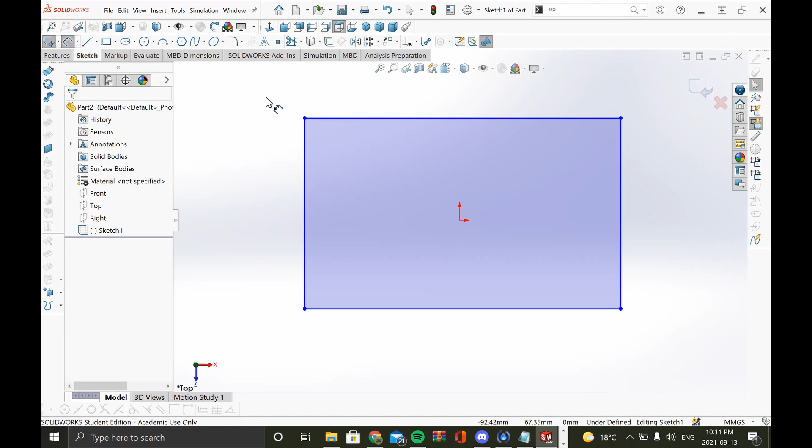Once you click on that tool, let's say I click here, you see this line has a length of 176.25 millimeters. If you want to change that, you just click, and let's say I want to change it to 80 millimeters, so I type 80, and there you go.

It's changed to 80. Let's say I want to change this line to maybe 60. I click it again, 60, and there you go, I changed it to 60. This Smart Dimension is going to be your best friend when you're trying to model 2D shapes.

It can basically allow you to modify the length of really any line or any points you need. You can even use it to modify angles, but since it's a rectangle, we don't need to modify angles, since every angle would be a 90-degree angle, and I don't want to change that.

But there is a cool thing that SolidWorks has in combination with the Smart Dimension. It's called the power trim.

First, let me start by sketching a line somewhat in the middle of this rectangle, sort of like that. So I just sketched a line right there.

There's this neat tool called the power trim. If you look at your sketch toolbar, there should be this option called trim entities.

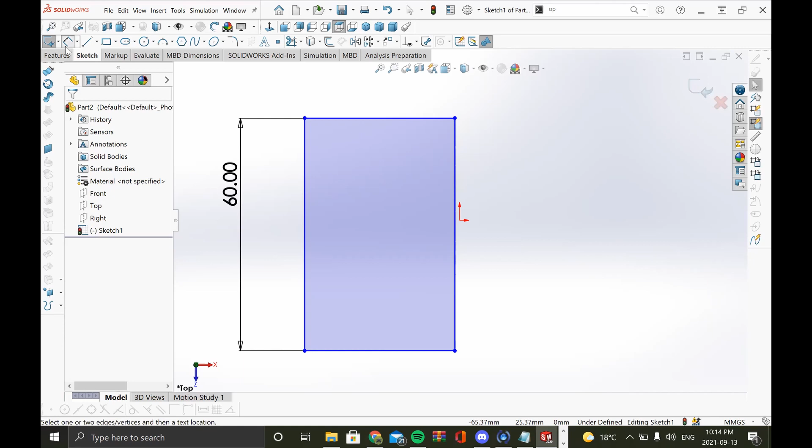To make sure that what I did was actually true, if you take the Smart Dimension of the new line right now, you can see it's pretty much exactly half of the length it was originally. So now you know that I did cut it in half, which is what I wanted to do.

Now, one thing that I don't like is that, as you can see, this right here is the origin. This is the origin of all sketches, and my rectangle isn't really at the center. So I do want to change that.

And how you can do that is with this thing called sketch relations. Basically, first you unclick your smart dimensions just to let SolidWorks know that you're not dealing with that anymore. Then you hover over this line. You have to exit your sketch too. Then you start by hovering over this line because you really want to get this right here. There's this dot right here, and you want to click that.

Click the wrong thing. It is really tricky. That's why I advise you using a cursor anytime you're CADing rather than a trackpad. It would just be easier for you. So once you click that midpoint, you can also click the origin itself.

So now I have these 2 points selected, and if I want them to basically be vertical with each other, you just add the relation vertical. Any questions so far on what I just did? I basically wanted to center my rectangle on my screen and then on that whole top plane.

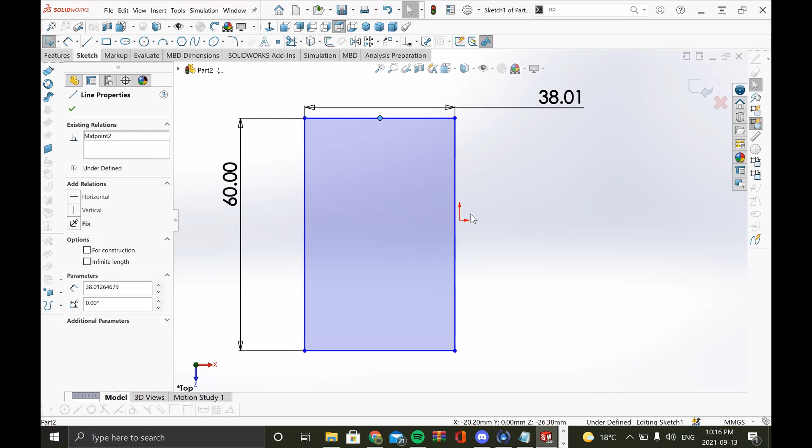So this top line right here, just hover over it and you would eventually come across the dot right here. Select that. You deselect the wrong results because I accidentally selected that. But yeah, it's the midpoint that I wanted to select, and you can see it selected. Then you hold Control to select two things at the same time, then select the origin right here. If I can do that.

So now I have both the midpoint of this line and the origin. And because I want to shift this rectangle to the right to make sure that they're both on the same vertical line, in this tab right here that says add relations, I just click vertical. So now I made them vertical to each other.

So yes, you do have to select the actual entity that you want to add that relation towards, if that answers your question. If it doesn't, just let me know, then I can explain a bit more. No, that's good. Thank you.

All right. So once you've made that, I basically managed to center my rectangle on what I wanted, which was, yeah, I just wanted to center it on my screen, center around the plane, just makes things easier.

Now, after that, so far we've discussed how to make shapes, how to use a smart dimension, how to trim entities, and how to add sketch relations. By the way, because this workshop is 2 hours, I suggest that you play with it on your own time, because I'm really just giving you a good framework as to where to start your learning, but don't assume that when you're done with this workshop, you can get 100%. Really, a lot of SolidWorks skills come from actual experience rather than lecture.

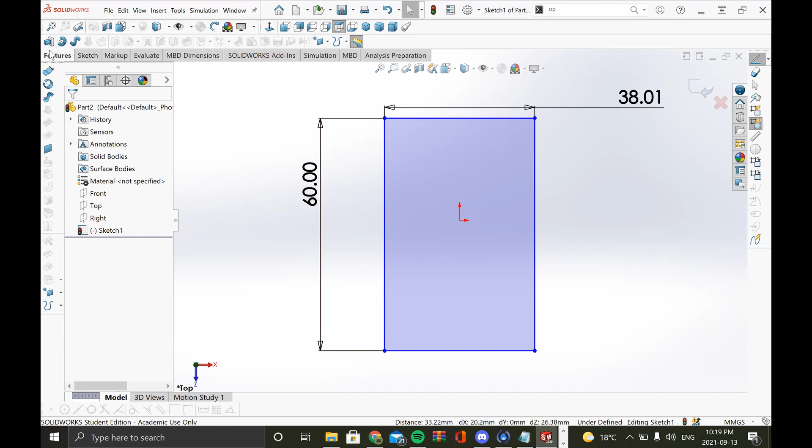So I'm going to stretch my 2D shape on a 3D plane, as you can see here. SolidWorks has really good UI, so you can either use the arrow to drag it up and down to see how high you want your 2D object to be, or you can be specific by manually inputting the dimension over here. Let's say I want it to be 30 millimeters high. There you go. Then you click OK. And there we have it. Now we have a 3D object.

Any questions so far on what I just did? I'm just going to be continually asking this just in case for those who are modeling alongside me, just to make sure we're all on the same page. If not, then I'm going to continue.

One thing that is really good about SolidWorks is that they allow you to backtrack a lot. So even if you're done with this and you realize you need to change something you did before, if you see this blue line on the side tab, this is basically your rollback feature. Think of this whole thing as a timeline, and this blue line is where you're at right now. So if you want to go back in time and change a small feature that you did, just so you can make things more suited towards your needs and go back towards your current timeline, you can do that in SolidWorks.

So you basically drag this line up, and as you can see, we're back to the time where I didn't create that 2D shape. And now, like if you've made your edits and everything, you can drag the line again, and now we're back to the future, if that makes sense. This rollback feature is definitely going to be your best friend, because as you're CADing, you get tired, you might miss a few details. This is more advanced than a basic undo button, because it really makes you be specific as to which point in time you want to go back towards. And once you go back towards that time, you can edit your features, edit your sketches, and go back to the future on your current timeline, just so nothing would be misplaced, and all the features will be towards your needs.

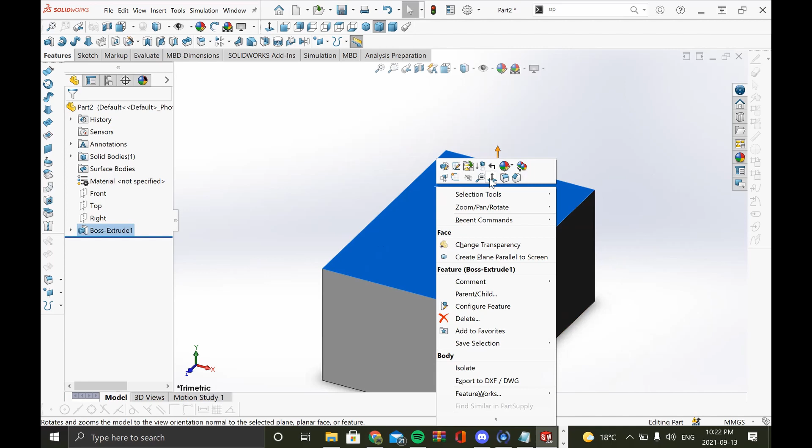So what I do is right click this, and all these icons here, you look for the one called normal to, that basically puts the camera, us, at an angle normal to the shape, just so we wouldn't be sketching at an angle. You never want to sketch at an angle because it's really a perspective view, and you want it to be normal to that view. So you click normal to, and now we're normal towards that shape.

Let's say I want to make a circular shape on this surface, then cut a circular hole through this block. And I can do that. So what I do is I select this face, then I sketch on this face. I start my circle. Again, there are different ways to create a circle. You can start with the middle, or you can build a perimeter around a point that you want the circle to be on. But I'm just going to be simple and start with the middle of the circle. So I just click anywhere in the rectangle, then I drag my circle here. Let's say I want my circle to be this big.

But if you don't want it to be that big, again, the smart dimension is your friend.

You can tailor it towards your need. If you don't want it to be 29, it can be, let's say, 25, and that's fine too. So now that you have the circle, you have the size of what your hole wants to be. Now you have that 2D shape, and you want to make that 3D hole on your 3D model.

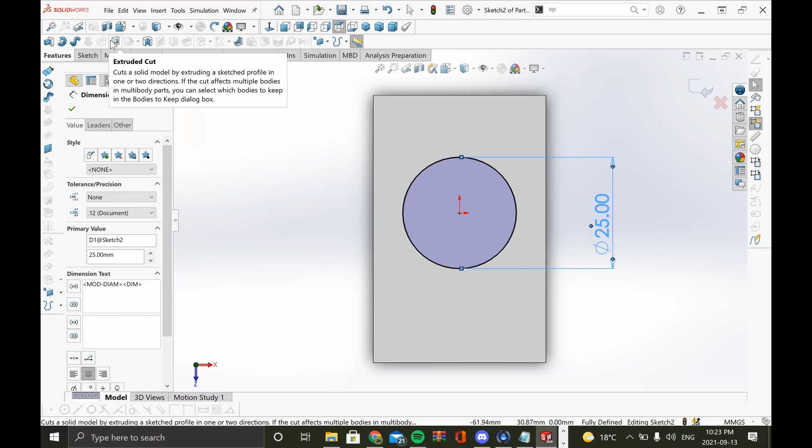Anytime you're doing anything 3D, once you're going from sketch, you go to features. So now we've dealt with extruded boss base. Now we're going to deal with extruded cut. Extruded cut doesn't stretch the circle on a 2D plane. Rather, it makes that circle into a hole that can cut through your models. So extruded cut is what you're looking for.

If you're working on a cursor, you can click your cursor wheel and move it to see how your hole is going to be on your model. Let's say, yes, I want my hole to go through the entire thing. Or if you don't want it to go through the entire thing, you can just drag this arrow right here. If you want the hole to stop at the middle, that's fine. If you want it to go all the way through, that's fine too. But I want mine to go all the way.

Can we do this on a trackpad? I'll be honest with you, CADing is pretty hard on a trackpad. It's definitely different movements. It is possible, probably, because I'm pretty sure SolidWorks accounted for that, but it wouldn't be as precise as a cursor. I'll show you later on how to do it on a trackpad though.

But once you make this... yes. Sorry, your microphone's making a strange sound at some points. Would you be able to just disconnect and connect it again? Maybe that'll fix it. Yes, no problem. I'll be back in a jiffy. Then give me a sec.

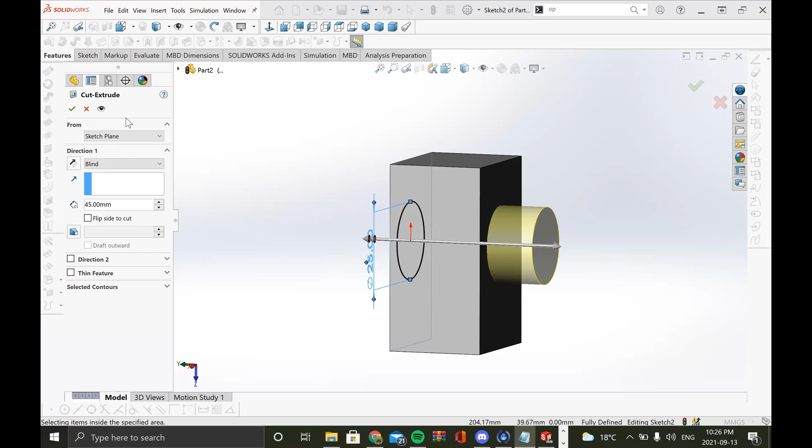Okay, back to what we were doing. So now we made the hole, and we determined how big we want it to be. So I click the check mark, and there's our hole. Now, just to reiterate what we did: we clicked the surface, we sketched on the surface, we used the extrude cut feature to determine how deep we want our hole to be, and we made the hole.

We clicked the check mark, and now we've made that hole. Again, just to show you how efficient this rollback feature is, you can literally roll back to the point in time where you just finished your extrude but haven't started your cut. So if you do that, now we're back to the point where we didn't even start doing the cut. But if you want to roll back to go back to the future, now rollback is your friend, smart dimension is your friend. It really helps, I'm telling you that right now.

Okay, now you've learned how to create 3D models. Now you've learned how to cut on those 3D models, but we're going to do a bit more advanced stuff. First thing you want to do is, a lot of the times when you're engineering in general, people don't really like to have sharp edges.

So there's this feature called fillets and chamfers. It's on your feature toolbar, and it looks like this. This is what you should be looking for. Fillets and chamfers, instead of sharp edges, offer a curve, which might be for aesthetics, might be for safety reasons, whatever you want. They're there for you. You can click the dropdown if you want a chamfer instead of the fillets, but I'm just going to make a fillet.

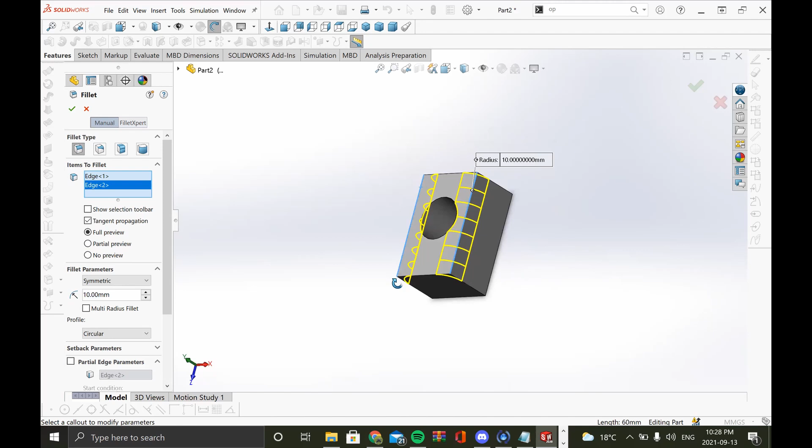Yep, that's good enough for me. Again, you can alter the radius of the fillet because it's a circular shape. They don't really use length to measure how big you want it to be, they use radius because it's that circular path. I'm going to make it, let's say 8 millimeters. That's good enough. Once you're done with that, you just click the check mark, and there you go.

Now you have the fillets. You don't have those sharp edges anymore. You might even do it not for safety, but really just to make it more aesthetically pleasing, which is fine too. But that's how you do that.

If you want to add a chamfer, it's really just the same procedure again. So you click this icon right here, but this time you click the drop down and you select chamfer. Then you click these edges right here, whichever edges you want to add the chamfers on. I'm just going to click these edges right here.

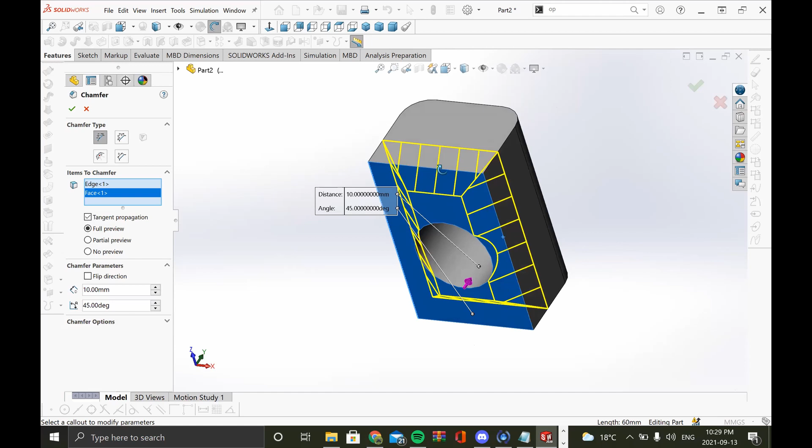This is where the cursor really comes into play, because I'm not sure how accurate you can be on the trackpad. Again, you can alter the length and the angle of your chamfers. I'm just going to make it into 5 and 45 degrees, which is fine with me.

Now to answer that person's question about how you rotate your model with a trackpad, if you don't have a cursor wheel, what you can do is go to this toolbar right here, and there's this thing called view orientation. If you click that, you can basically see, okay, I want to go to the top, I want to go to the side, I want to go to the bottom. And yes, that's how you can view the different parts of your model while not having that cursor wheel.

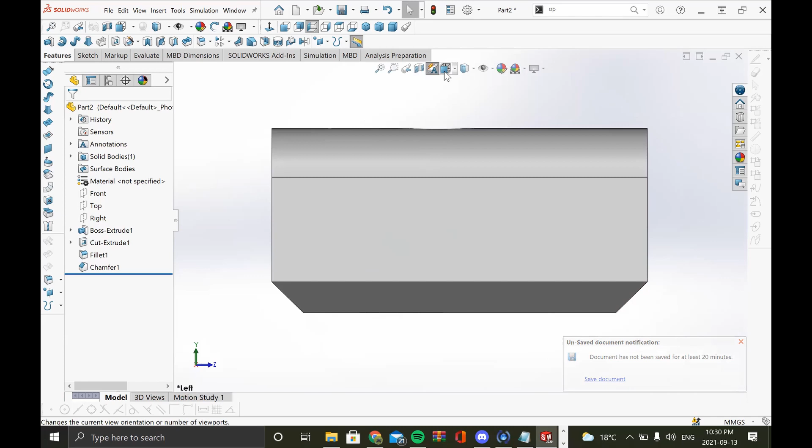Remember to save your document, guys. I'm not going to save this because I already have a document ready for you, but remember to save every now and then, because, you know, CAD in general, it's really frustrating when you crash. So save consistently, rule of thumb.

Yes, you can press space too. Either that, or you can right click and this wheel comes up. It's just different shortcuts, but whatever suits your needs, you can do that. I just personally like using the cursor wheel because I feel it's faster and it allows me to view it at my own custom angles.

Next, we figured out how to make 2D shapes. We figured out how to use the smart dimension. We figured out how to use the trim entities, sketch relations. We figured out how to do an extruded boss, how to cut holes. We figured out the rollback feature. We figured out fillets and chamfers. But now let's get into the more advanced ways of making 3D models.

So if you want, you can save this, but I'm going to make a whole nother model right here, so don't save for me. And I'm going to make another part just to show you some of the new things that SolidWorks installed. Okay, so back to square one.

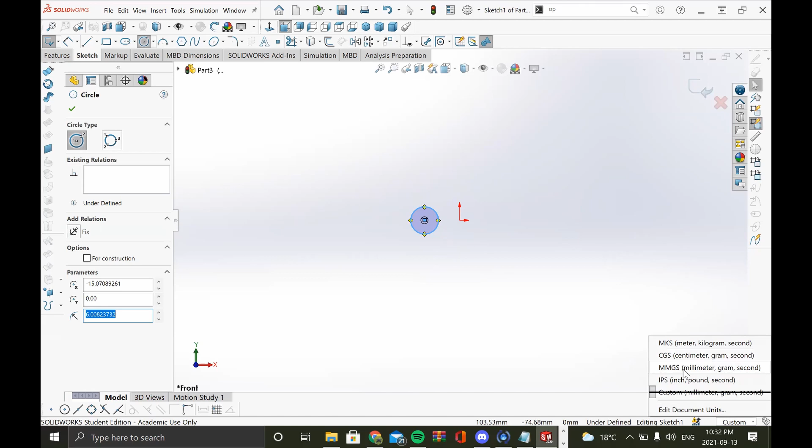Let's say I want to make a sketch on our front plane, do the same thing, sketch, and let's say the front plane. Now what you can do is start with, I'm going to start with a circle. Simple, easy enough. I start with a circle, basically that size. And before I do my measurements, just remember to change your units. It can be any unit you want, but I'm just going to go with MMGS. Right click your sketch, edit sketch.

One thing I like is that it doesn't always have to be a sort of linear extrusion. You can extrude to make 3D models at different angles. You can even do revolve or sweeps. So that's what I'm going to go over right now.

So in order to do, let's say we're aiming to do a revolve, which basically rotates your 2D shape along an axis to make a 3D model. So what we do for that is first make some construction lines just so we know which direction we want to revolve around.

So you go to sketch, and let's say we want to make our axis. So we want to make a line, but not just any regular line. You have to click the drop down and click center line, because that's going to be the center of our revolution.

So you just have to make it vertically, and you know it's vertical because of that yellow icon. And now we've made the axis for this circle to rotate on. And now we have that.

We go to features, we go to revolve. You do select the line because it's our axis of revolution, but you also make sure the circle is what SolidWorks is referencing. So as you can see here, they basically took the circle and revolved it around the axis, and that's what we wanted. So basically they took this 2D object, revolved it around the axis in order to make this 3D donut.

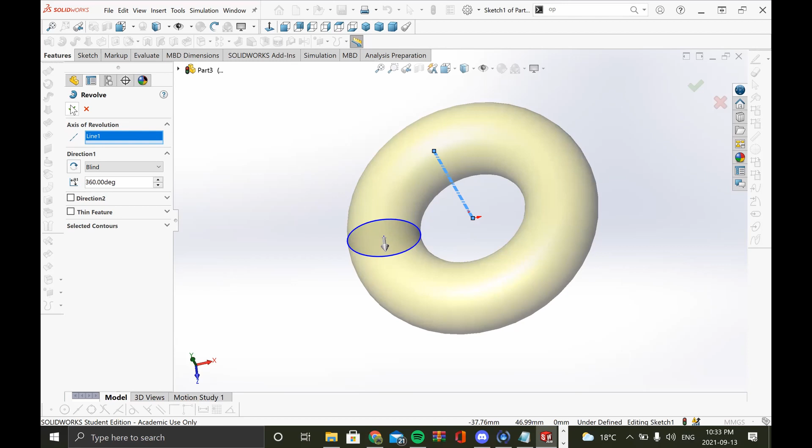So just so you know, there is more than one way to make that 3D object. It doesn't always have to be that linear extrusion. It can be done in different ways, and this is an example of the revolve feature. There are other ways too, like you can make a swept boss or base, whatever suits your needs.

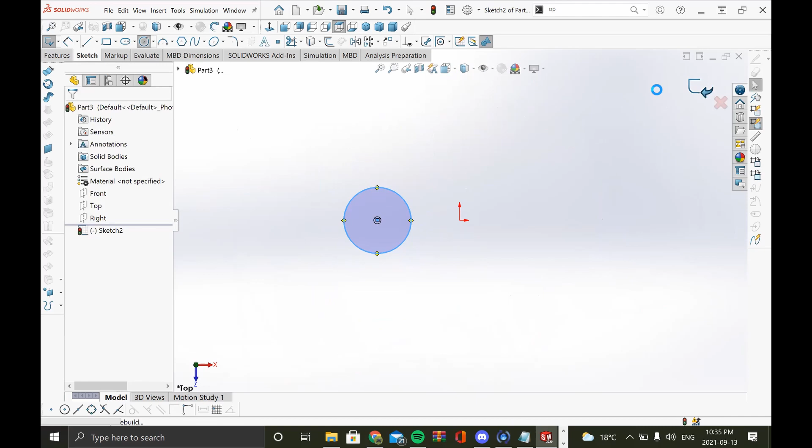This is where the more advanced techniques come in. Then I'm going to sketch again, but this time on a different plane. So basically what I just did is click this icon, which is always here. This is basically your design tree, and in the case that you're currently working with a feature, you can click this to view all the planes again.

When you're dealing with swept boss bases, you want to make sure your second sketch is on a plane that is perpendicular to your first sketch. So since I sketched on the top plane, my next one should be on the front plane, if I can get it right. That should be good, yes. So we just right click the front plane so I can go normal to it right there.

Now that we have our shape, we need the actual guiding line that is going to be swept around, so this is where splines come in. I'm just going to use a spline. It's easy enough—a spline is really just like a freehand form of sketching to make curves. You can just click the different points, and SolidWorks will automatically make those curves for you.

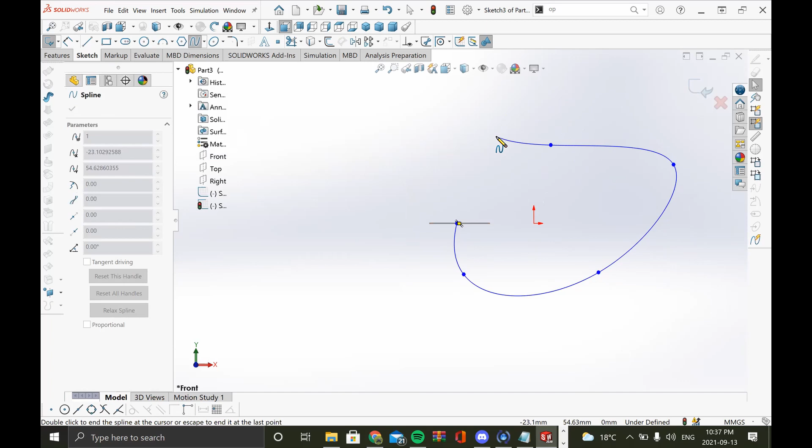That's good enough for me. Okay, so—oh wait, it deregistered. Hold on. That's good. So once you're done, you just click the spline option.

So now, as you see, you have two sketches on two different planes, and they absolutely have to be perpendicular to each other, or the swept boss base feature is not going to work.

Okay, so now we're going to start with the swept boss base feature. As you can see here, I basically replicated these two icons right now. First, you need your profile, then you need your guide path. Our profile, in this case, is going to be our circle right here, and our guide path is going to be that spline we created that's perpendicular to the circle.

And as you can see, SolidWorks took that circle and guided it around our path to make that 3D object. So this is basically what the swept path does—once you have that 2D shape, it stretches it along that path in order to make that 3D object.

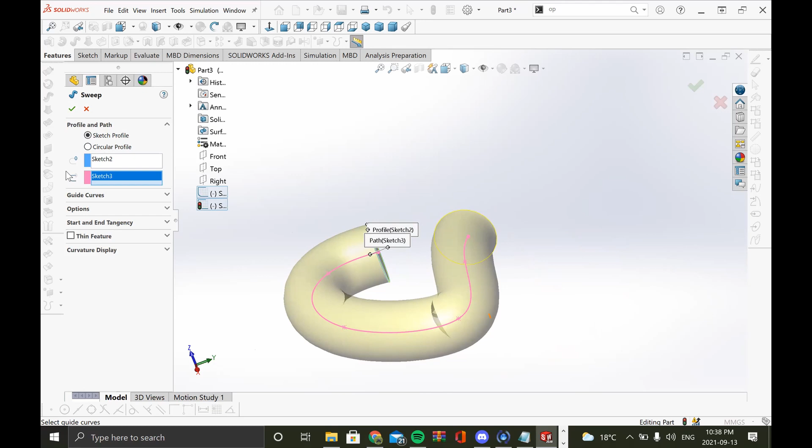This is particularly useful when you're dealing with tubing, so to make tubes with custom shapes rather than just linear extrusion. You can make your own path, set the diameter of the tube, and use this swept boss base feature to make that tubing according to the path you wanted. So I clicked my sketch, clicked the path of my sketch, and SolidWorks did all that for me. And that's the finished product—sort of like a tube.

Next, if we are in the process of making a pipe, obviously this isn't really a pipe yet because nothing can run through it. So I want to introduce you to one feature called the shell feature. This basically creates an offset of your 2D shape and hollows out your model.

So what you want to do is go to the shell right here, and you click the 2D surface that you want to start that shell from.

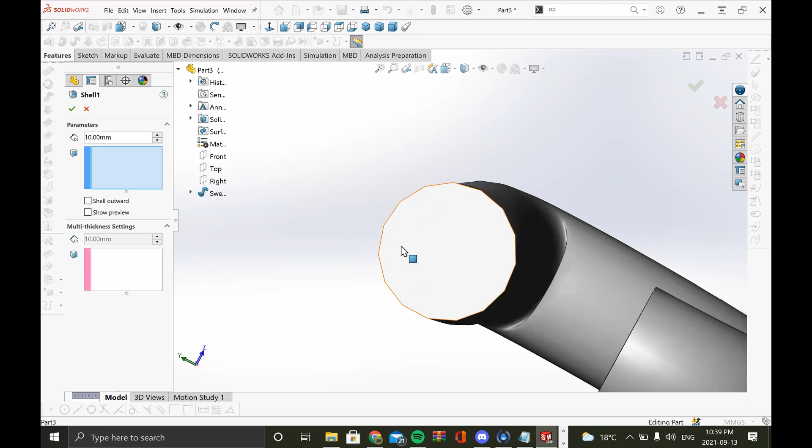Sorry, I think Marco has a question, he just raised his hand on Zoom. Do you have a question, Marco? You have a question about this guiding tool.

What technique would you have if the guiding path and the profile aren't perpendicular to each other? So you want something maybe that's not this flat tube.

Yeah, so the reason why normally people try and do it perpendicular is because that's a sure way to make sure the sketches are connecting to each other. Because if they're not connected, SolidWorks wouldn't be able to verify which is the sketch and which is the guiding path.

But in the case that you don't want it to be perpendicular, and you want it to sort of be swept at an angle, in that case you wouldn't be using regular sketches. You'd be using a feature called 3D sketching, but that's outside the scope of the CSWA, which is why I didn't go over it.

If you want to learn about it, you can do that. 3D sketching is basically, instead of sketching on normal planes like front, top, and side, you can sketch at any sort of angle at all. So you can sketch at multiple angles at once rather than singular planes, which is really beneficial, but it's outside the scope of the CSWA, so I wasn't really planning on going over that.

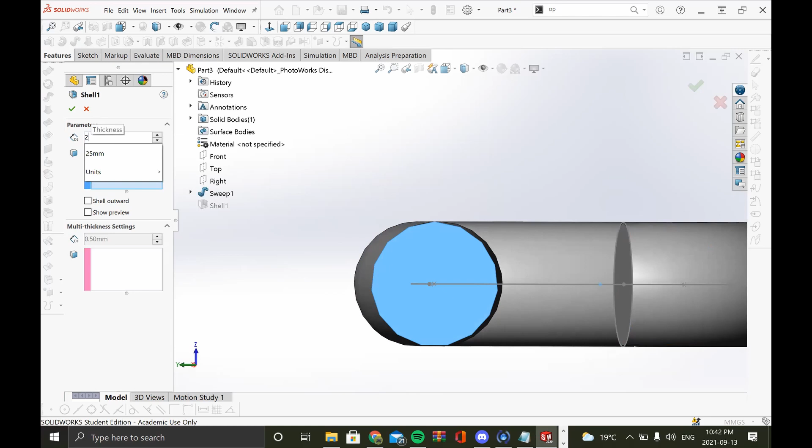Let's check. Yeah, that looks too small. It did it, but it's too small, so it looks a bit awkward. I'll make that just a bit bigger, let's make that 2. And there you go, that's your tube. As you can see, it basically hollowed out the inside of your pipe, so now water can flow through it.

Any questions so far on the feature I just did? We just went over how to create sketches on different planes. We just went over how to use the swept boss feature. And now I just taught you how to use the shell feature, which basically hollows out your models.

Just to reiterate, for the shell feature, you really just select the surface that you want to shell out and select your thickness, basically the thickness of the shell, and you just click OK for the most part. And now we've created that hollow tubing that we wanted.

Now, if there are no questions about all the modeling I've done so far, this is where we get into your answers for the CSWA. Basically how the CSWA is constructed is that they ask you to model an object, but you don't submit CAD models, rather you submit the masses of those CAD files, in kilograms or grams, and that's how they judge instantly whether you're correct. Which makes sense, because if you get a dimension off, it wouldn't be the right mass.

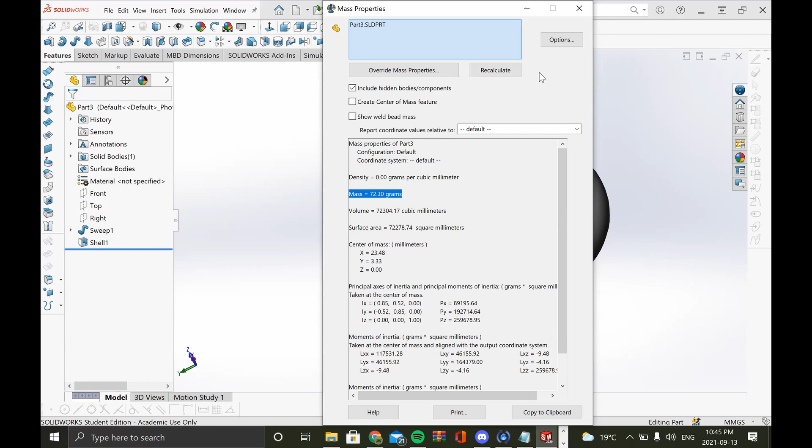The CSWA question was to create a sketch on two different planes and make a tube out of it according to the dimensions I just used. They wouldn't ask for the CAD, just the mass, so they know you got it exactly right. I'm pretty sure they only allow a 1% error, higher or lower, so they're pretty strict on your mass value. That's why you can't guesstimate it, you have to use the mass properties feature to make sure you get it right. So my answer would be 72.30 grams for the mass of my pipe.

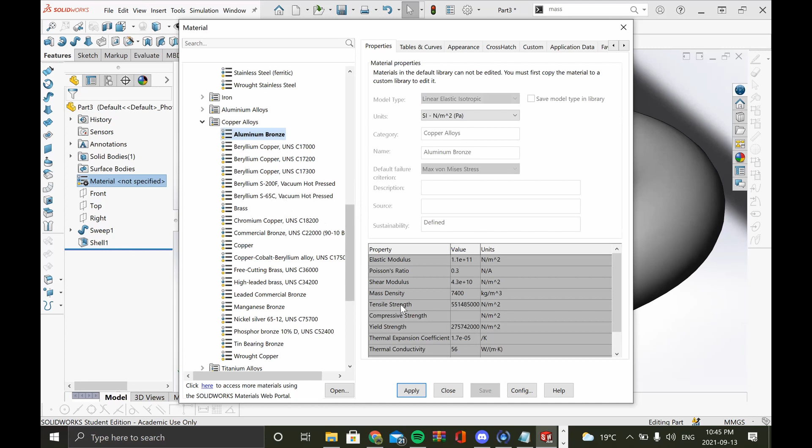But one thing they can do is ask you to specify the material of your pipe. Right now, SolidWorks default setting makes all your models steel, but you can change that. In the sidebar, right click and click edit material, and you'll be able to choose which material you want your model to be. It has a plethora of materials, different kinds of steel, reinforced steel, hardened steel, wrought stainless steel. Let's say I want mine to be a copper alloy, like aluminum bronze. I click apply and cancel this, and the color change shows the material has changed.

Once we click mass properties again, go to the command prompt, type in mass properties, and it will show up. As you can see, my mass has changed, and this makes sense because I just changed the material the pipe is made of. Once you change the material while maintaining the same volume, due to density and other properties, it's going to get either heavier or lighter. Because I changed mine from steel into an aluminum copper alloy, the mass went up to 535.05 grams, and that would be my answer. So the basic formatting of these CSWA questions is that they give you technical drawings of models, ask you to model them, and for your answer they just ask, now that you've modeled this, what is your mass value? Because that's how they know you modeled everything in accordance with how they wanted.

So now that we've done the basic modeling of parts, although there's quite a bit left to cover, I just wanted to give you the basic SolidWorks UI and how to convert that 2D shape into a 3D model. Now that we've done that, we can start venturing into the world of patterns.

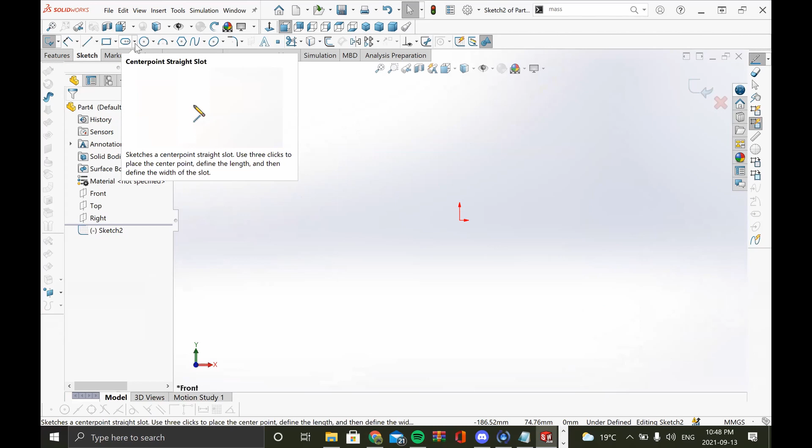We've done a rectangle, we've done a circle. Let's say I want to make a slot. There are different ways to make a slot: straight slot, center point straight slot. I'll just go with straight slot. You click two different points, then modify the radius and such for how big you want your slot to be. You click, and there's your slot.

Sorry, unfortunately your microphone's making noise. Maybe if you just unplug your microphone and re-plug it back in, would that help? I think the thing with the audio drivers is that it's embedded in the computer itself. Let me stop sharing for a bit. Now it seems to be okay, actually. I just switched my mic to an external mic.

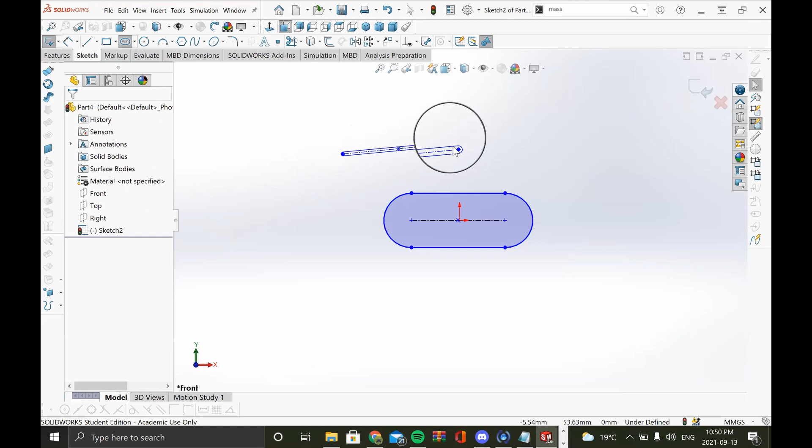Screen share. Okay, we just made the slot, and now I want to show you about patterns. Oh wait, I did not mean to do that, so let me just remake the slot once again.

Next, we want to make a pattern of this slot. In case we don't want to make the slot over and over, we can make a pattern of it instead. You go to Sketch, then Patterns. There are different ways to make a pattern: you can mirror it on the plane, make linear patterns, or make circular patterns.

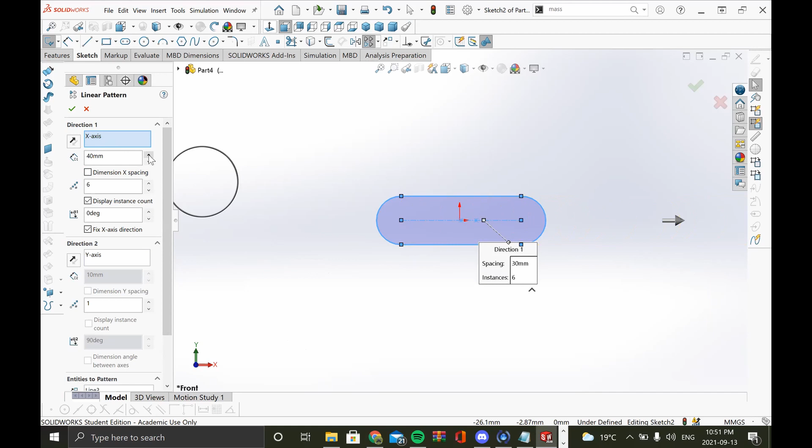I'm just going to make a linear pattern. You click linear pattern, and if you want to make it on the x-axis, that's fine—if you want the y-axis, that's fine too, but I'll leave it at x-axis. You have to click the sketch you want to make the pattern on. There are different settings: if you want multiple entities, that's fine, and you can adjust the spacing of these entities. I'm just going to make two for simplicity's sake. That should be good.

As you can see, it basically made a duplicate on the x-axis of that sketch I just made. Any questions so far?

How late does this go? It goes till 9 p.m. PST. Can you confirm that? It goes to 9, yeah, it goes to 9.

What I have planned is that from 8:30, that's when I really work on a specific CSWA question, and I have 30 minutes attributed to that. So if you just want the basic ideas and framework of what to learn, 8:30 is when that happens. CSWA stands for Certified SolidWorks Associate—basically an exam you can take to get certified and show your SolidWorks skills. You don't need to pay for an online course for it, you really just pay for the exam itself. You go on the SolidWorks website, and I think it costs around $99 or so. If they change it, you pay for the exam and you can get certified to put on your resume for SolidWorks skills. So yeah, it's really just an exam that shows your skills in SolidWorks.

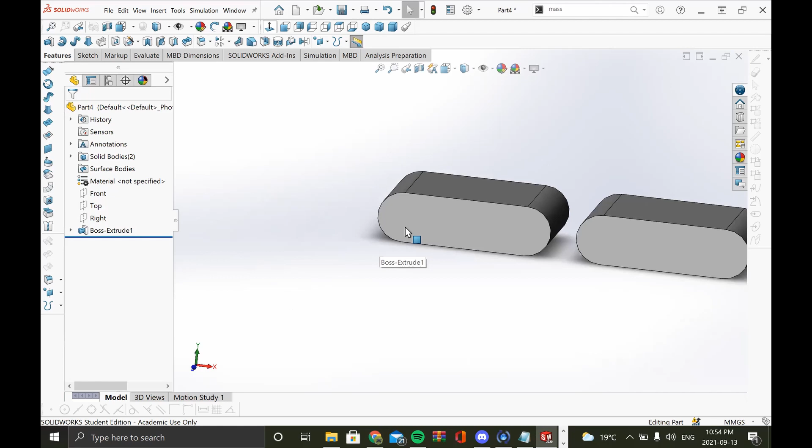Now, one cool thing I find about 3D modeling is that you can really choose to amend your models at any point in time. I taught you two different ways. Number one, you can use the Smart Dimension tool to edit your sketches, and you can also use the rollback feature to go back in a point in time to edit your features.

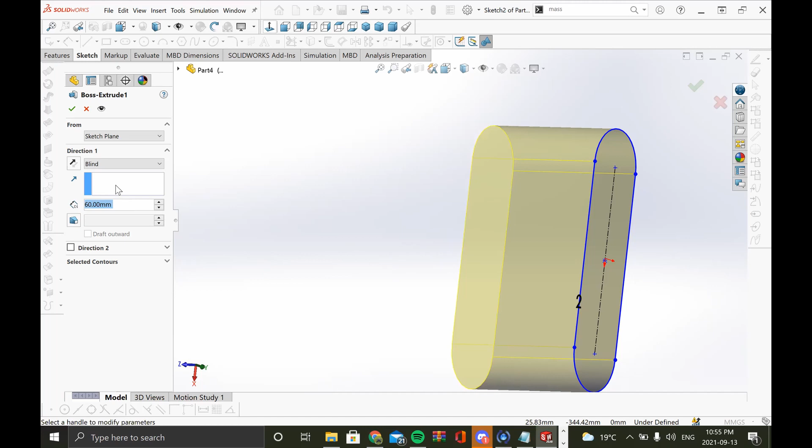But what if I wanted to change the height of my boss extrude right here? What if I want to change that? Let's say I want to make it a bit higher. So what I can do is right click boss extrude, then click edit feature. As you can see here, I go back to the original tab for boss extrude. Now let's say instead of 70, I want to make it 60 instead. So now I made it 60 and everything's good, so now they're both 60. It just allows you to edit those boss extrude features and be really malleable in your design rather than just having strict values that you can't Control Z for.

So now we've gone over linear patterns and we went over how to edit your already made extrude. So what I can also do is show you how to convert entities. Converting entities really just applies or projects 2D sketches on 3D surfaces.

So if you click here and it's a sketch feature, I believe... what's it right here? Oh, it's the wrong one. Oops. Sketch - it's called offset entities. You click sketch and you click offset right here.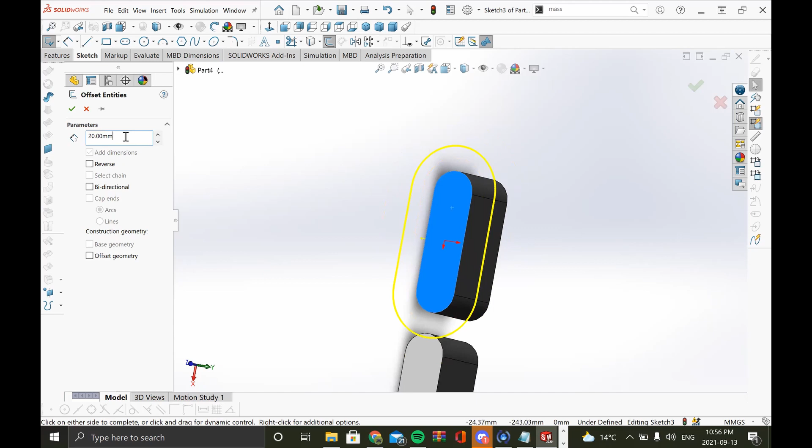As you can see right here, it basically took the sketch that made the surface, that slot, and you can offset it by any amount. If you wanted to basically have a distance of 10, you can. If you want to make it bigger, you obviously can. But let's say I want to make it 10 - actually yeah, I'm going to make it 10, that's a good amount. And I click OK. It basically offsets the sketch that made the surface by a thickness of 10.

And I can even go further and extrude this 2D sketch by a certain height. And if I do that, that's possible, as you can see here.

The reason why this specific offset entity wasn't replicated on other members of its pattern is because I clicked this surface specifically. If I roll back my feature, I clicked this surface specifically, hence why it wasn't duplicated on its other instances. But if you want to duplicate them both, you just hold control and click that. But I just wanted it specifically on this surface, hence why I just clicked that, just so it wouldn't be replicated on its other brothers and sisters.

But again, any questions so far on how to offset your entities or sketching in general? Because at this point, we're pretty much good in terms of CSWA sketching. So if you have any questions about sketching, now's the time.

Yeah, I have a question about the sketching. Does this offsetting and resizing of the sketch work with more complex drawings?

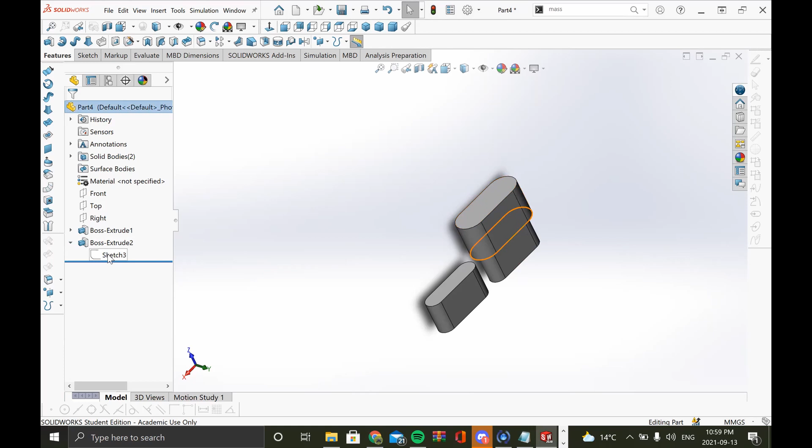Actually, let me see if I can generate an error. That's even possible - yeah, I'll use this one. I click here, then let's say I want to do an offset.

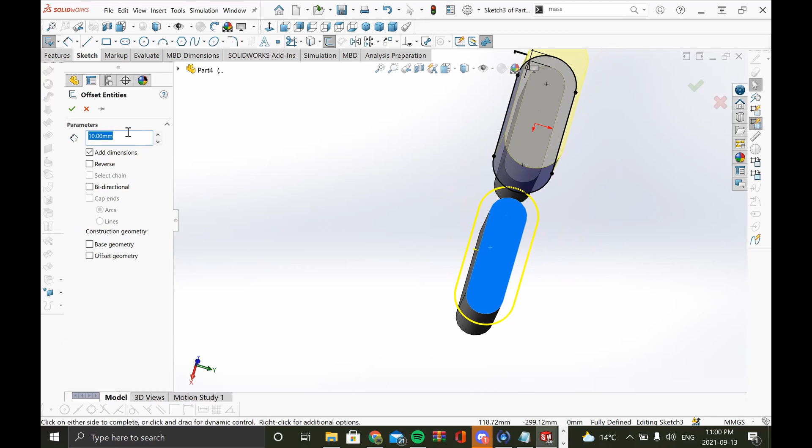Edit sketch. If I want to do an offset, a quantity chosen too large - so if you put a large enough value that the sketch intersects with itself, that's when it would generate an error. Let's say I put something too small, even -1. Well, actually it would start going in on itself, if that's what you want to show, that's fine. But if you put -1, as you can see, it's just not registering, because that's not possible to have a -1 distance.

But in the case that you are using splines, to answer your question, it should still be good as long as that eventual offsetted sketch doesn't intersect with itself, because that would be an impossible equation for SolidWorks to solve. So it's really just being smart with your offset entities and making sure the sketch doesn't intersect with itself, the lines don't intersect. But if all those conditions are met, I wouldn't see why an error would be generated.

Does that answer your question? Yeah, thanks. Alrighty.

So we've dealt with offsetting entities from surfaces and extruding that. Any other questions for sketches in general before I move on to assemblies? Because that's what I have next on my list. After assemblies, we deal with inserting components and mates. Then after that, we deal with drawings. And after that, I'll walk you through one CSWA question. That's what we have left for the workshop.

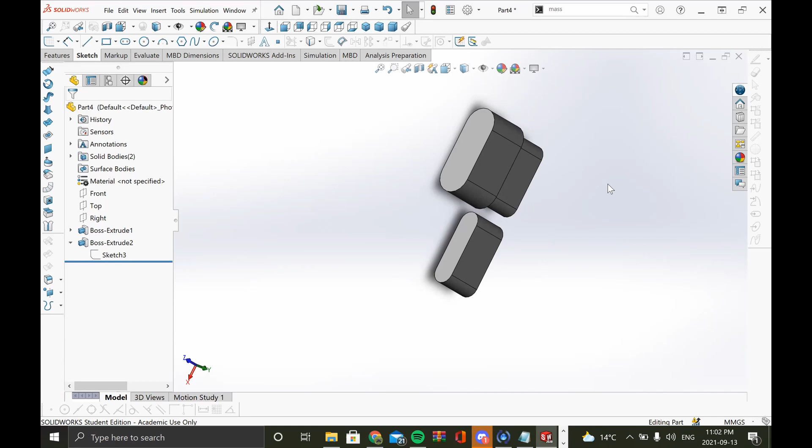So if you have no other questions on sketching, I'm going to go ahead and work on assembly. Okay, I assume there are none. So don't save for me - if you want to save it for yourself, that's totally fine.

Control N, and let's say I want to make an assembly. I do have some pre-made parts that I'm going to attempt to assemble. Just for time's sake, I pre-made the parts to fit in the 2-hour slot. What I'm going to do is make a key, with the key chain and all that. Let me just get all my files.

When you want to get a file, when you click Control N and start an assembly, you click Browse to go through your directory. I have my directory on my other screen, if you're wondering - you're currently not seeing it, but right now I'm just picking out all my components to use. Click Open, and once you click Open, all your components would start appearing. So you just click, click, click.

Okay, so these are all the components I made. None of these should prove too hard for you guys to CAD yourselves. As you can see, all I did here was create that circular path and used swept boss base to make this turbo. Then I used sketches to make those extrude cuts.

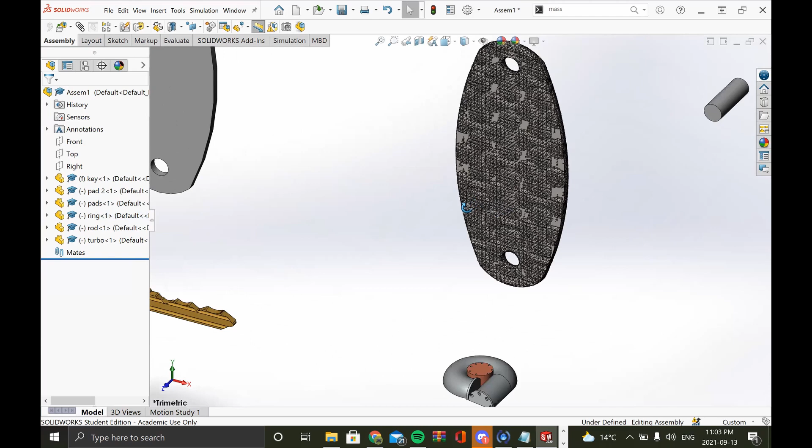Same thing here - I used the Revolve feature on this specific slot to make that link. Here is a simple extrude cut and extruded boss base. Same thing here, I made a circular sketch that I extruded. Then here, same thing, it's just an extruded boss base, but I actually used individual lines to make this sort of ridges right here for the key.

It takes a bit of time, but I use no skill that wasn't previously mentioned in this workshop. So theoretically, with due time and experience, you guys should be able to make this. Obviously you wouldn't be able to make this right now because you just need more experience with the SolidWorks UI and everything I've just told you. Once you have more experience with the skills laid out in this basic framework, this should be in your skill set to make something similar to this.

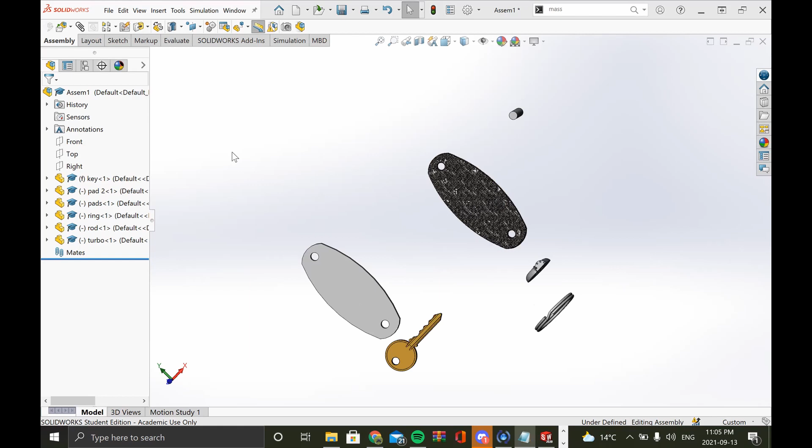But now for the actual assembly of this, what I strive to do right now is basically make a keychain that can be used. So first thing first, once you insert all your components, you would want to use this thing called mates. As you can probably tell, they basically link your components together in order to form an actual assembly.

So there are different types of mates. You basically have to click this right here, safety pin - you click it, and those are your mates. It's in your top toolbar. You start by clicking all the entities that you want to mate. There's the coincident mate, parallel mate, perpendicular, tangent, concentric, lock. I'll give you a good framework as to what the major ones do. The first one I'll go over is the coincident mate - basically what this does is link two surfaces to be on the same plane as each other.

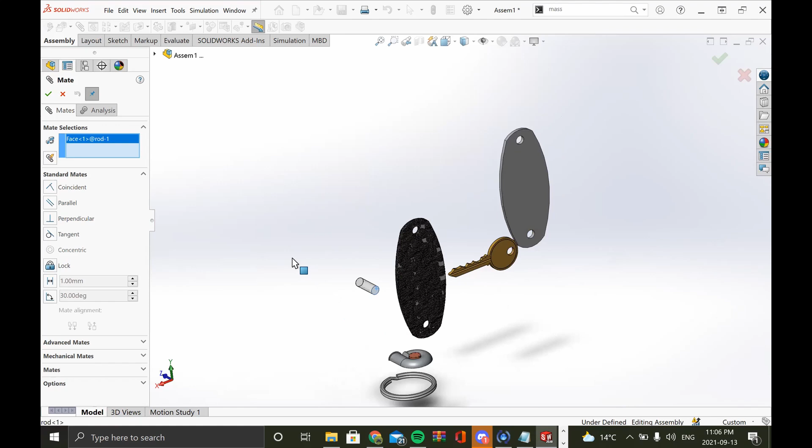There's no better way to teach it than to actually do it. So if I click this surface of the rod and click this surface right here, as you can see, I made them in the same plane as each other. So they would operate on the same plane, which is good. That's what I want. I click OK and deselect the mates. Now no matter how I move my rod, it's always going to be on the same plane as that object. That's what the coincident mate does.

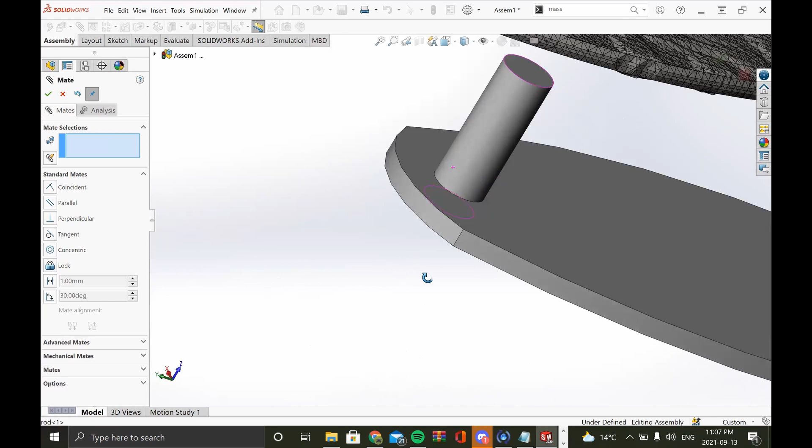But what I actually want, in accordance with making it on the same plane, is for it to fit in this hole right here. So this is where the concentric mate comes into play. What the concentric mate does is basically mate the two axes of each of the circular entities together, so the two circular entities are parallel to each other. So if I click the round part of the rod and the same circular part of this piece, as you can see, they pair the axes together so they're aligned with each other, and that's what I want. Now they're fully defined, in the sense that they're on the same plane and the circles line up, which is what I want.

I'm going to do the same thing, but for this part right here. So first I'll make the coincident mate. Oh, we have a question in the chat. Oh no, that's me, never mind.

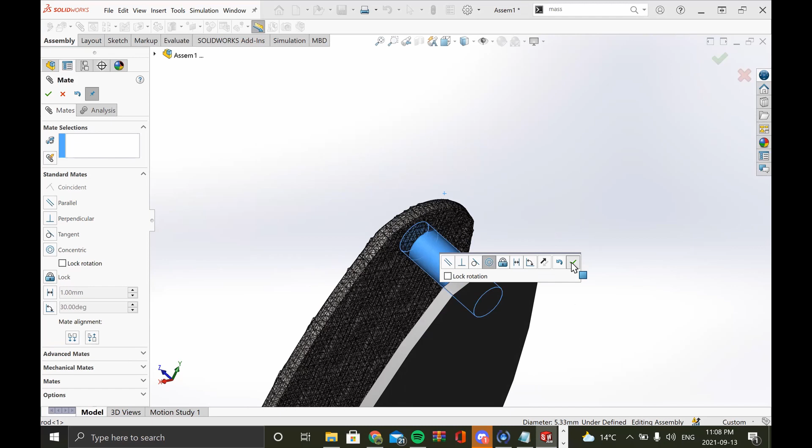I'm going to mate the surface with this surface, and that would just make them be in the same plane with each other. Then I'm going to do the concentric mate, so the circular entity and this circular entity. Most of the time, SolidWorks already knows what you're doing, so it would auto-select the mate for you, which is fine. That's what I did right now, and as you can see, it's fully defined, which is good. This is what I want.

One thing about assemblies is that anytime I click and drag this, it moves around. But if I don't want it to move around, I can just right click one of these objects, and there's a thing called fix. Once you click that, it's basically fixed to the spot, so it wouldn't move around when you click and drag it. It just makes organization easier, but this one can still rotate. The reason it can rotate is because it's paired with the axis of this and it's concentric, but there's no actual mate restricting it from rotating around the axis of the rod, so it can still rotate around, which is fine.

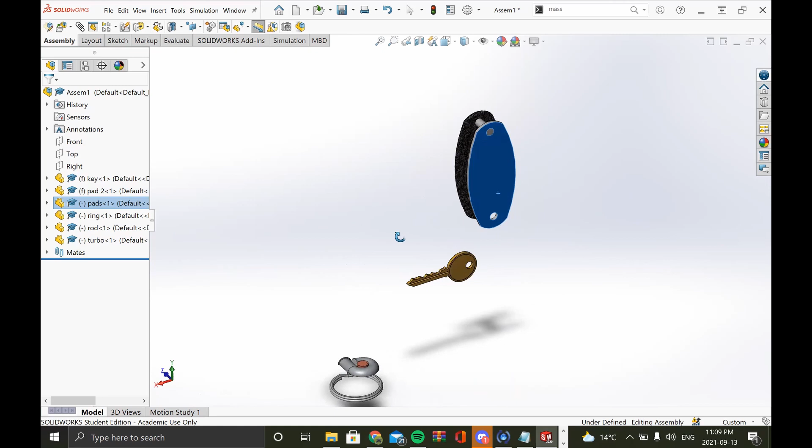Next thing on the list is that I want to pair this key into this rod right here. I want to put this key in, but first this component already seems to be fixed. So again, you can right click, and instead of fix, if it's already fixed, you would see float. It's either fix or float. Float basically allows you to move it, but if you right click again and click fix, you're not allowed to move it. So since I wanted to move it, I'm going to right click and click float.

Now it can move. Now I want to basically pair this hole right here to be part of this rod right here, that's what I want to do. So as you can already guess, it's a concentric mate I'll be using. I click mates, I click the circular entity right here, and I click the circular entity right here, and as you can see, now they're paired with each other. I click OK, and as you guessed, it's now where it's supposed to be, sort of in that same axis.

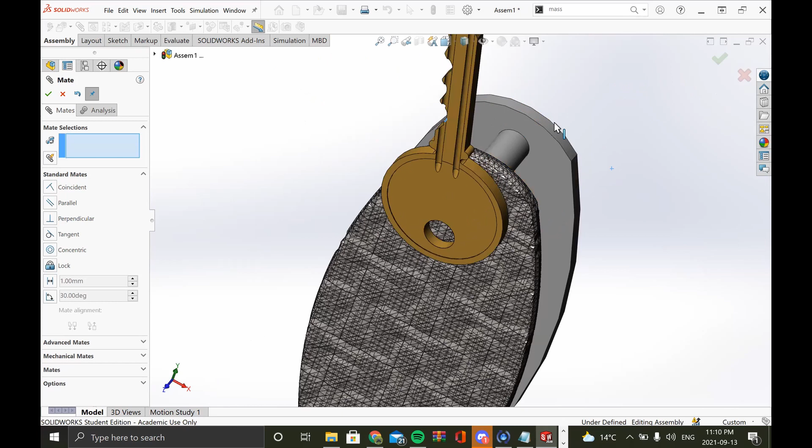As you can see, it sort of goes through the objects, because right now the only mate that's constraining its movement is just that concentric mate. But later I will talk about a fairly advanced mate that basically limits the movement to just from here to here, it's called a distance mate. I'll talk about that later, but right now I'm just going over the basic mates.

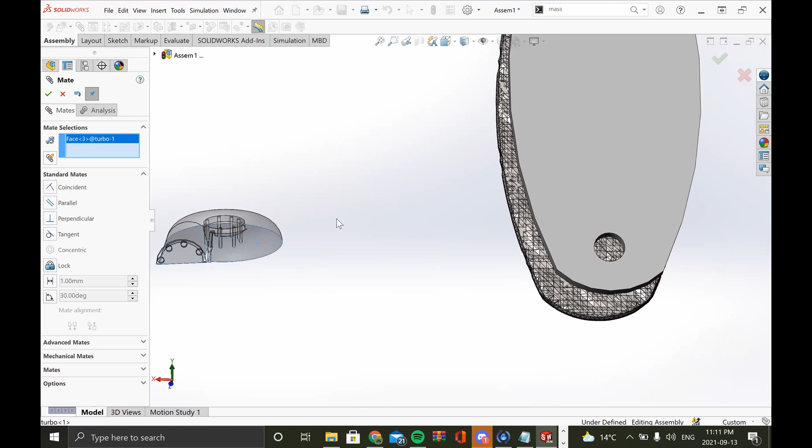So another thing I want to do is add this turbo I made. It's really just for aesthetics, doesn't add to the keychain itself, I just want to slap it on this surface. So first I want this surface attached to this surface right here. To do that, I make a coincident mate, because I want this and this to be on the same plane. So if I select this and I select this, that helps with that. Now as you can see, they're on the same plane.

Click OK, mate plus fix. Here's the thing about fix - fix isn't really a mate. It's really just to make the components stop moving, just for organization of the assembly. So it's really just a temporary thing, just to make sure that

your components stop moving. A better explanation would be, think of the fix as sort of duct tape, but think of the mate as Gorilla Glue. The fix feature is really just like duct tape your model to your desk so that as you're working on it, it just doesn't move around. But the actual mate is Gorilla Glue, because you actually want those two components to be bonded together permanently. So that's what the mate does. Fix is really just to help your whole assembly procedure go easier, just because nothing's moving. So it's just a temporary thing, but the mate is the actual Gorilla Glue, the actual permanent joint you're going to make. Got it? No problem.

Okay, so now you've made the coincident mate, but what you were probably thinking of when you said fix was this lock mate. Basically this lock would be fixed, but permanent, if that makes sense. So basically it locks a component to a specific position. Again, the difference between lock and fix is that fix is just duct tape, just for organizing your components so you can make the assemblies easier, but the lock actually locks it to that position permanently.

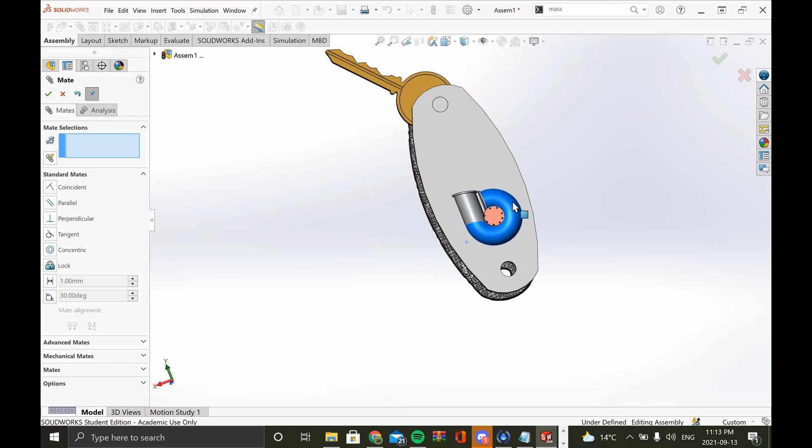So in this case, since you're already on the same plane, all I really have to do is position the turbo to where I want it. Let's say I want it here, and I would select the lock mate, and click any part of the turbo and any part of the keychain, and lock, and that's fine. And if I click OK, as you can see, the turbo now moves with the keychain because it's locked to that specific position. If it was fixed, it would just be a temporary addition.

So if you save your assembly and go back to it again, it might not be fixed anymore, because it's just duct tape to help you organize stuff. But since I used lock, it's permanently locked toward that surface. So now it's permanently joined there. In the physical sense, it's really as if I just used Gorilla Glue to glue it onto the surface.

Okay, next is to put this ring on here, on this hole right here. That's the next thing to do.

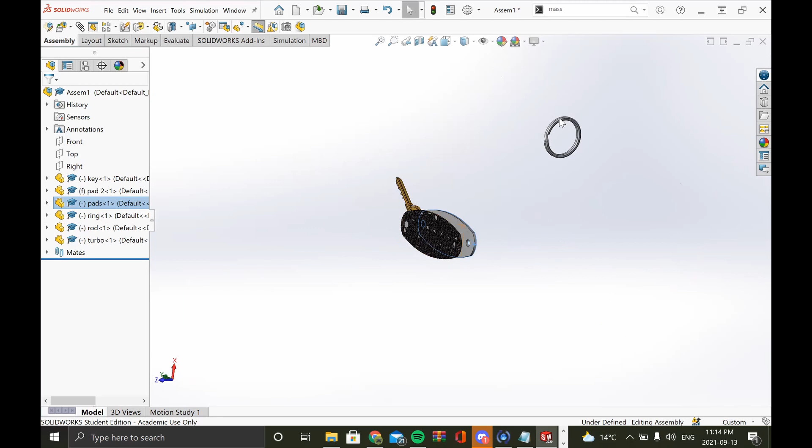Again, it's really just making sure - first you actually have to move it to make it close. If you don't align it yourself, SolidWorks might bug out. So I suggest just putting it at the right angle, just so SolidWorks can more easily figure out which specific type of mate you're going to do. So I'm just moving it to be around here. This is what I'm trying to do.

If you want to rotate your components, you can right click it, and there's this thing called the move triad. You can move it left, right, up, center, but you can even rotate it on an axis like that. It's called the move triad.

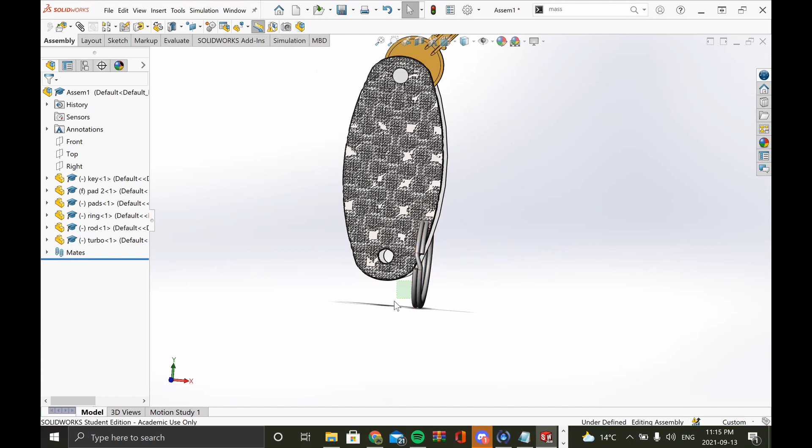But now that I've made it into position, I'd in turn again be using the lock mate because I just wanted to lock it permanently toward this position and not move it anywhere. So I click mates, I click lock, I click any surface of this, any surface of that, and I click OK.

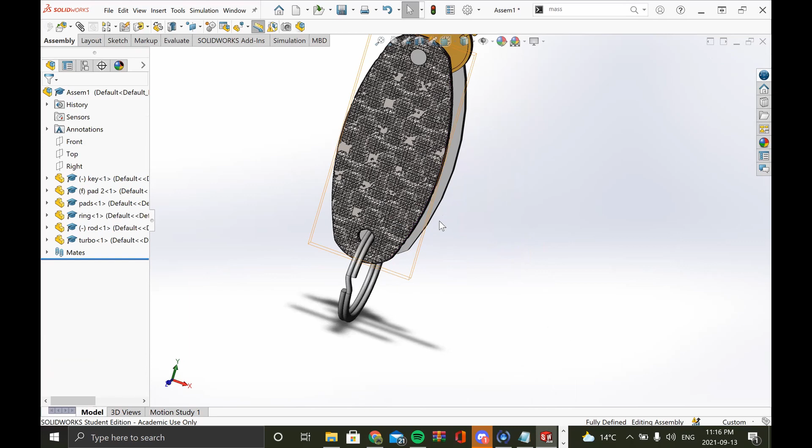So as you can see now, it moves towards the surface. Oh yeah, so I also needed to lock it towards the surface too. That's actually good that I ended up making that mistake. So mate, lock the surface and the surface. Click OK. Now it's locked towards both. And that's pretty much how a keychain should look like.

This is sort of like a Dollarama keychain you would find with the turbo. Any questions so far about mates?

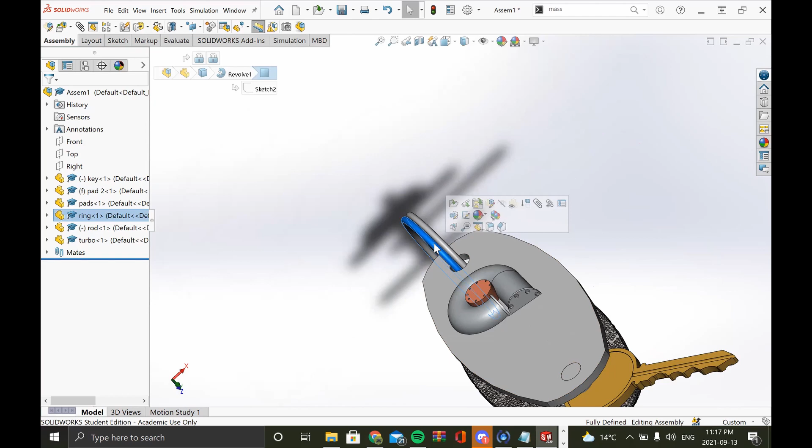Yes, Marco? On the loop, is there a systematic way of mating it so that it doesn't clip to your flat pieces? I think you just moved it manually, but is there a way to have it avoid clipping? Like clipping to, sorry, what do you mean by clipping to your flat pieces? Like the circle piece, it's fully in the holes, there's no part of that coil which is hitting any of the surface. Because if you look at it, it's clipping with that flat part. Oh, I get what you mean, like this part right here, right? Yeah. Okay.

You can try a concentric mate, but the reason I was shying away from that is because there are two different circular objects, so SolidWorks will bug out in that sense because it wouldn't really know which axis to choose from. So on my part, it would really just be manually positioning it more. The thing about the lock mate is it locks it in position.

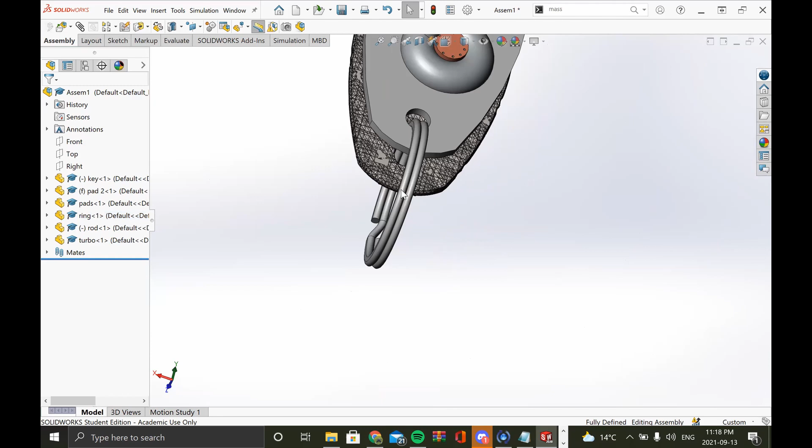So it's a bit manual in the sense that you have to position it yourself, but you can play around with concentric mates. I just feel it would bug out, just because there are two different circular entities in this component, so it wouldn't know which one to choose for that specific mate. My rule of thumb with mating is that if you keep running into errors, figuring out whether it's a concentric mate or a coincident mate, and you don't know which one to choose, but SolidWorks keeps bugging you out, I suggest just using a lock mate, because it's really just a manual process and it locks it into that specific position. So for avoiding clipping, yeah, it's really just me.

Yeah, I can just roll back this. Actually, honestly, I'll just delete this altogether, or edit it. Again, edit it. I'll just delete the last two mates that I did, because they do sort of intersect with each other, which doesn't look good.

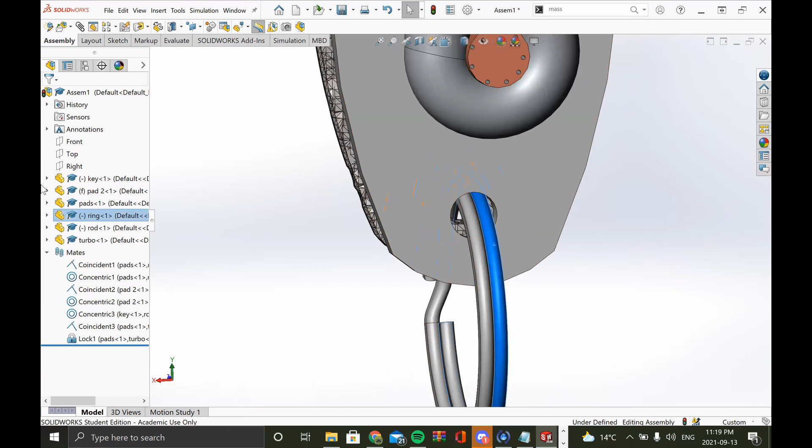I just move it a bit upwards to make it look a bit nicer. If I do that... mates. Oh, wrong one, lock. There. That should be a bit better. It doesn't clip too much, but yeah.

Any other questions about mating? After this, I'm going to go over appearances so you know how to get these different colors. But anything about mating specifically, though?

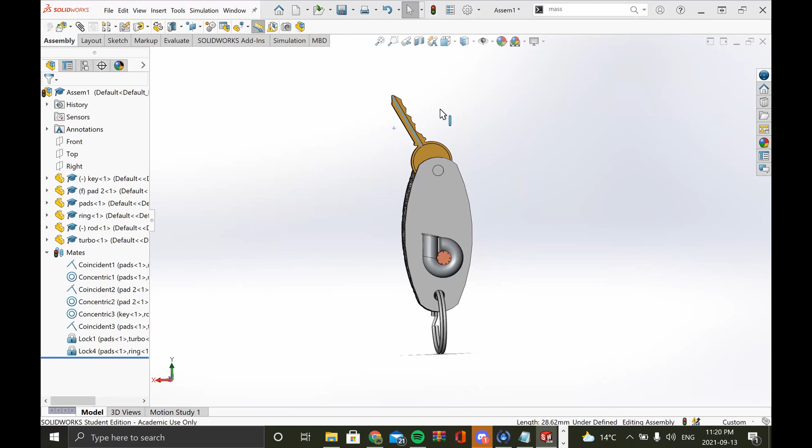Or if you need me to just reiterate what type of mate I did for what part of this. Oh, okay, good thing I touched that, I forgot I needed to show you how to do this distance mate.

Okay, so as you can see, all I needed for this was the concentric mate. But realistically, you would want the key to only go from here to here. So basically you would use a distance mate that would make sure this surface doesn't go past a distance constraint.

So what I would do is first pull it to my starting position, which is going to be pretty much here, and click mate. Actually, I selected the wrong surface, so I'm going to deselect that. Delete. And let's say I want it to be a distance constraint, but it's going to be an advanced mate, this type of constraint.

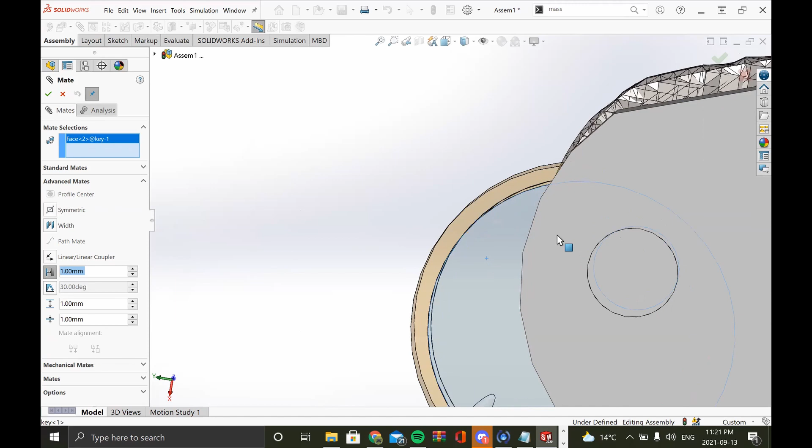So this is one of the advanced mates. I want it to be between this surface and this surface. So what this mate basically does is establish a minimum and maximum distance between the two. If I want my minimum to be 1, that's fine, and this is the minimum, as you can see by the icon. And the maximum, I would make it a bit bigger.

Not that big, let's say... does 9 sound? 9's good. Okay, so I want my biggest to be 9, and I want my smallest to be 1.

Basically, it just shows that the max distance from these two surfaces should be 9, and the minimum distance should be 1. Actually, technically, it should be 0, because that means they will be touching each other. Okay, so there we go. And that should fix things.

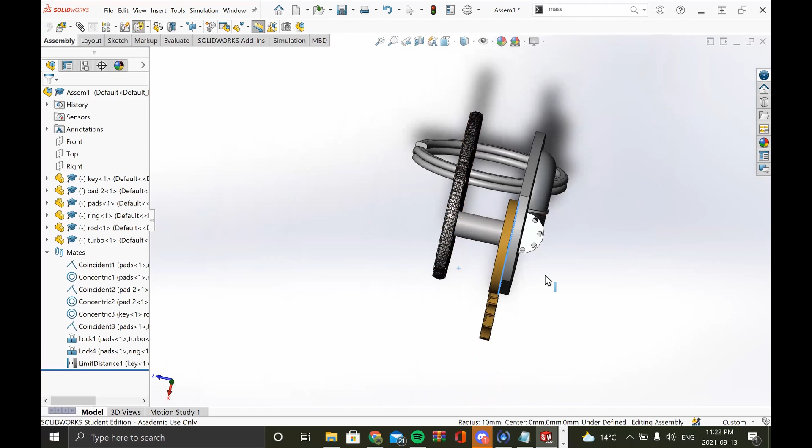So as you can see, I can't go too extreme, I can't go past these boundaries right here. So minimum distance means you're touching, the max distance means it should theoretically be touching the other one. Technically it would be more than 9, but to get that exact value, you sort of have to trial and error to see when it's touching it.

So, any questions about the advanced mate, the distance mate? Always remember to go over this video over and over just to make sure it clicks with you. But that's basically a quick rundown of how the advanced mate goes for distances.

Any questions on mates in general? Any questions on mates, sketches, or modeling in general before I go to appearances and drawings? Nope. Okay, cool. All right, so that's a keychain.

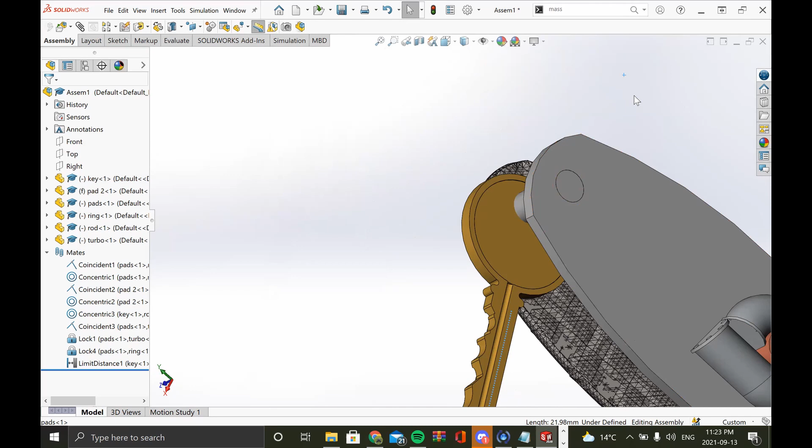That's how you make certain assemblies. Now I'm gonna walk you through how I made this gold, how I made this copper, how I made all this. So SolidWorks does a good job with rendering. I personally use my rendering in Blender, but SolidWorks does have its own rendering software.

So basically what you do is that if you can see this right tab right here, you click appearances, scenes, and decals. If you click that, then drag it out, because for some reason mine isn't. Okay. Click the dropdown, and you can see it has a plethora of different appearances you can make your components to be. Let's say I want this to be some shiny metal.

So I would click metal, and chrome is usually shiny, so I'm going to click that, and I want mine to be a shiny chromium plate. So I put that here, and they give you different options of if you just want the surface itself to be shiny, if you want the whole part to be shiny, and stuff like that. So I just want the pad itself to be shiny, so I'm gonna click that.

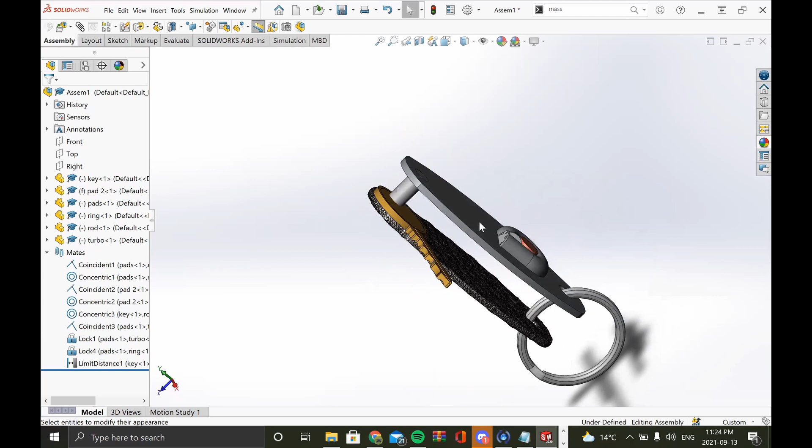It doesn't show right now because right now it's really just, it's not rendered. It's just still in the modeling part, but I will render it in the future just so you guys can see the finished copy. So I made that into chromium, a shiny metal.

I'll click appearances again, and let's say I want this rod to be made of bronze. Yes, let's say a polished bronze, which should be good. And I click yes, I want the whole part to be bronze and not just the surface. And yeah, I already put the appearances for this.

Okay, let's say I want this ring again to be a different color. Let's say gold, let's say a shiny gold. And I want the entire part to be shiny gold. And there you go right here. And that should be all the materials for the keychain.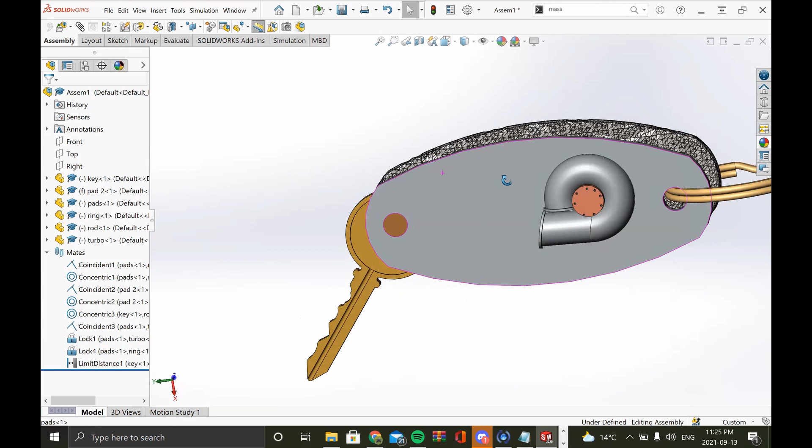And now, once you've done all your materials, now you can have some fun with rendering. Rendering is honestly, in my opinion, the more fun part of CAD because it just makes your design look much more sleek. So for rendering, what you do is that you have to have SolidWorks Photo View 360. That's basically an additional feature of SolidWorks that would help you to render models in greater detail.

I think if your SolidWorks comes with your student download from your student website from UBC, they normally do offer Photo View 360 with it. So you should have it on there. If you don't, I'll tell you how to add it right now.

So what you do is that you go to File, Tools, scroll down, and you go to Add-ins. Then you click Photo View 360. These are all the features I personally have with SolidWorks, but for photorealistic rendering, you just check Photo View 360 if you do have it, like that. Then you click OK.

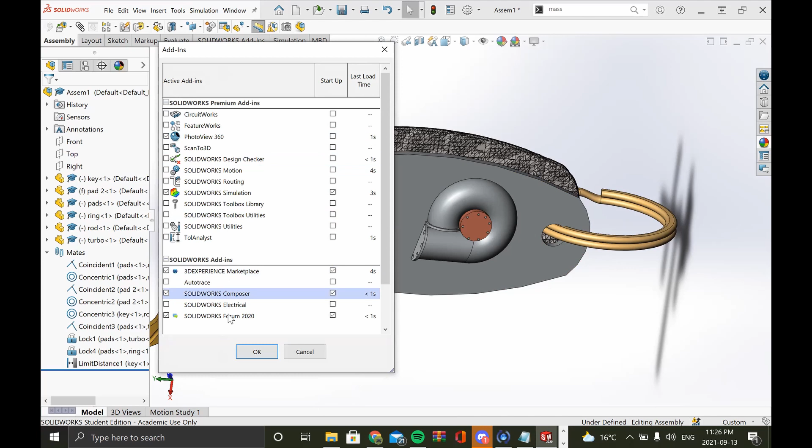So now you should see it in the panel here and here to render tools. So you click render tools if you're ready for render. And this is sort of the angle I wanted as for rendering.

I click first, I can preview it or I can do the final render. I'm probably just doing the final render straight away. But first I need to add a camera. Camera is just really a point of view for what you want the render to be as. Let's say I want the render to be like sort of like that.

I'm just making this really quick because this isn't officially part of the CSWA, but I just feel like if you're CADing in the future, you definitely want to see your renders of your models just for fun.

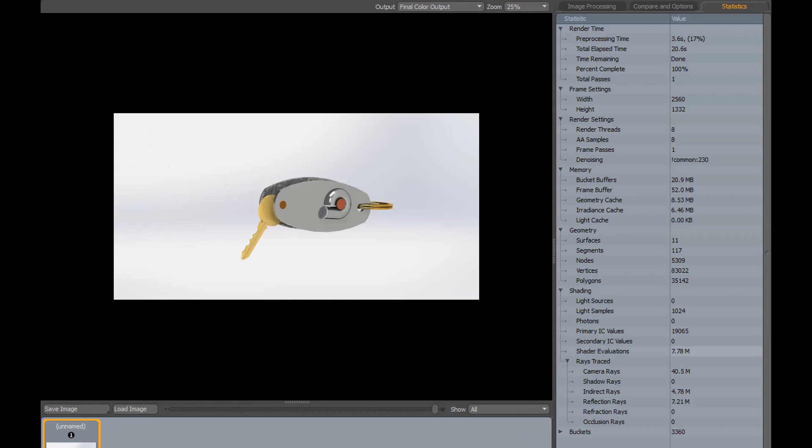And that's what you're doing for rendering. Once you're done rendering, you can save image, save it as keychain. Those are my other renders. So you can save it as keychain and you can exit that. I'll show you the finished product.

That's the finished product. That would be how it looks like once all the lighting and all the appearances have been added. That should be what your keychain would look like if you did have the CAD model and you did apply the right appearances. But any questions on appearances?

Or anything else I've done so far in this workshop? I'm down to go back with stuff I did in the very beginning if need be. No questions? All right, what's next on the list?

Now we can deal with, now it's really just drawings. Drawings is just engineering drawings, how to make drawings on SolidWorks. So now you're done your modeling, now you're done your appearances, you've done all the rendering, but normally when people want your CAD files, they also want some engineering drawings with it, just in case they want to make it for themselves, which is totally fine.

So in unison with your CAD model, you would also make some engineering drawings with, and basically what they do is that they add dimensions just so they know how big it is, all the angles, all the sizes, all of that. And instead of doing that manually, you can make that automatically with SolidWorks. So what you can do is Control N.

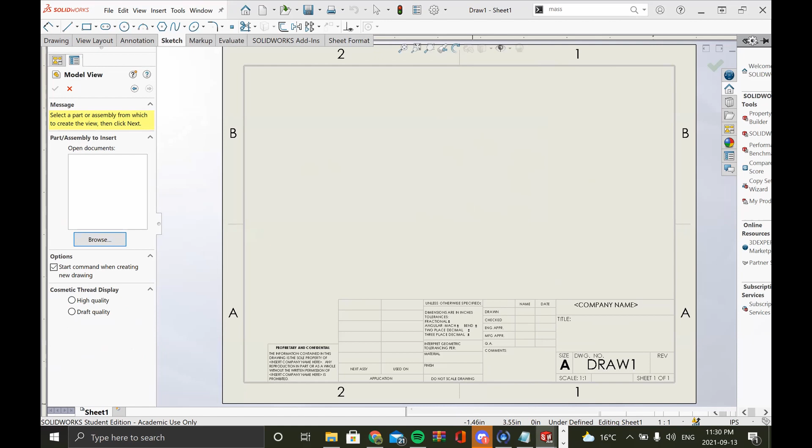You basically choose the part or the assembly you want to make your dimensions for. I'm just going to pick something simple, a circular rod I previously made. So you can make different views like that.

If you want to add more views, you can. You go like that. And let's say you want the right view, the left view, the back view. This is basically a circular rod, so nothing too fancy. So you can click the right view if you want to have it here. You can even have an isometric view.

Basically, you would have to go back to this icon, click rod, and you can have an isometric view right here. That's basically how you make the visuals themselves for your drawing. If you don't want these lines, you just click this eye right here and it would remove it. This cross right here is really just a center line, just so they know the diameter and all that stuff. We'll talk about it later.

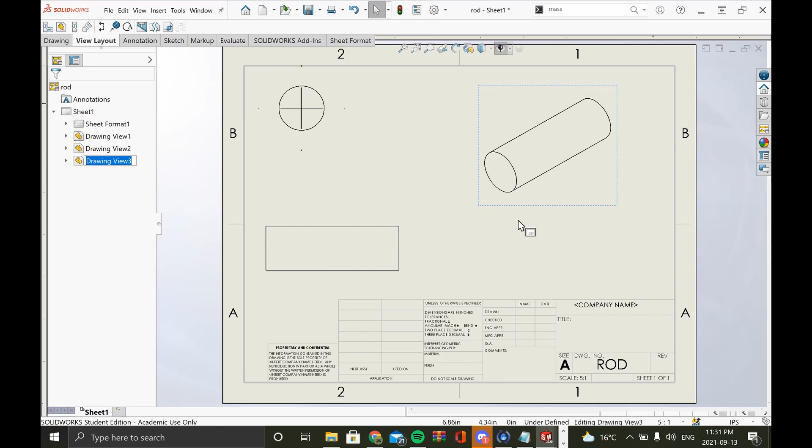But now that we've actually established the visuals of the drawing, now you can actually deal with annotating the drawing to give dimensions. So what you do is go to annotation, then go back to our old friend, the smart dimension. Once you get the smart dimension, you can click on any line, and it would show the length of it, and you can put that on your drawing like so.

And you can click this too, and it will show it has a diameter of 0.21. For this rod specifically, that's pretty much all the dimensions you would need, just the diameter and the length. But, engineering rule of thumb: don't put dimensions on your isometric drawing. Isometric drawing is really just to see the design as a whole. You should really only put dimensions on your orthographic drawings. For those not familiar with the terminology, orthographic drawings are drawings that are normal to specific surfaces of the object.

This is normal to the front plane. This is normal to the right plane. But isometric is really just viewing the object at an angle. Isometric basically has the object at a 30-degree angle from the normal line, like cutting through half of it. So it's basically just a view of the object at an angle. But what you should really be putting your dimensions on is the orthographic, which is the normal.

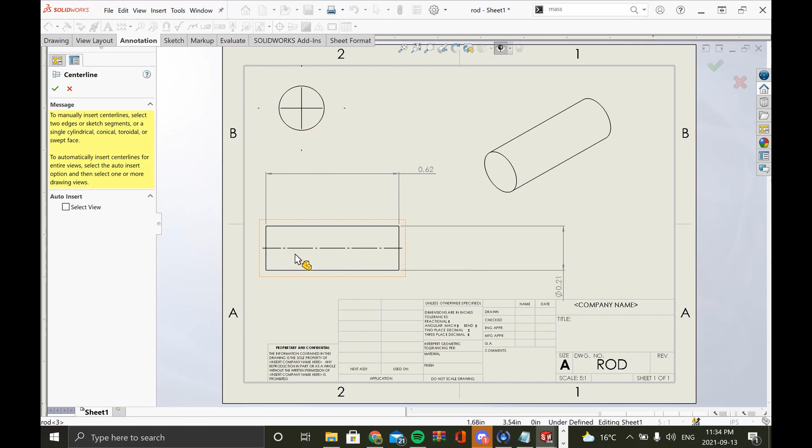Okay, that's fine. Here's some other stuff you can do if you want. It's not really part of CSWA, but since everyone can catch up fine, you can add center lines to your drawings. It basically shows the center of your parts. So if you click center line and just click this, it provides a center line. This center line basically shows the center of your rod.

All this is heavily automated, so it's really easy to make drawings of this quality. You can even click the isometric drawing and it'll show you that too. Really good stuff - it lets people know it's a circular object and the center line is the axis that the circular object is on.

There are other annotations you can use for your drawings, but I wouldn't delve too much into that, just because it's not really required by CSWA to do that. But yeah, that's pretty much it for drawing.

Any questions? Again, any questions on it? Because next is really just me going through past examples of CSWA questions. After that, that should be what I have for you guys for the workshop. The remaining time is really just Q&A on anything else. So if there's nothing on drawing specifically or anything else I've done, next is really just - don't save, I don't need this, you might, but okay, don't save.

Okay, so next I can show you some past questions from CSWA. I'm not sure if everyone here is planning on taking it, because I get the gist that most people are really just trying to learn SolidWorks, which is totally fine. But it'd be nice to show you what questions might pop up if you were to take it. You might not be able to do everything right now, since I just gave you a basic framework of what you need to learn and how to learn it. But it should at least make sense to some degree, hopefully.

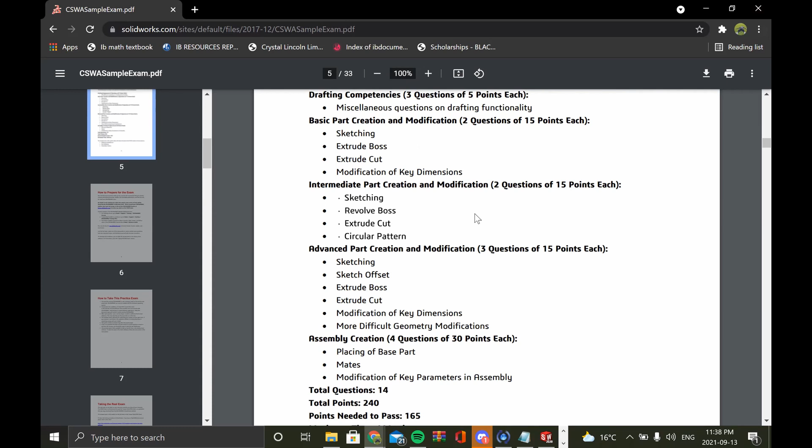Okay, so just a sample question. Oh wait, there's something on chat. No problem, yeah, I'll just show you guys a sample question of what was there.

These are really just some optional stuff, optional choices, but the main point we're looking at is right here. It might look intimidating at first, but I promise it's not that intimidating once you actually get started. They're just asking you to design this using these parameters as shown. If you look at the object, most of the work is just establishing this 2D shape.

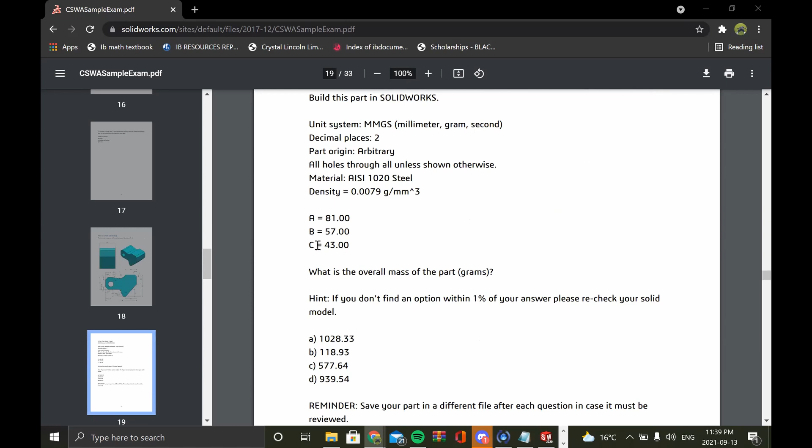Once you establish the 2D shape, you just use smart dimensions and input all of these values - 14, 13, 32, 40, 14, 7. Once you use smart dimensions to input all of those, you make an extruded boss or base. For C, they should outline it here - C is 43 millimeters. Once you have all those parameters, you input them and use smart dimension, and that's your part.

As I said before, they don't actually want you to submit your CAD files, they just want the mass of your actual part. So you use the mass properties feature I outlined before, and if it's close to any of these, that's fine, but they're really strict on it. Only 1% of your answer is actually allowed, so it's a 1% tolerance. You just have to make sure you get all these dimensions right, and you should be fine.

The rest is really the same - modeling parts with parameters and them wanting the mass from you. Yeah, this is just assemblies.

For the assemblies, it's pretty easy. As you can see here, it's really just concentric mates and coincident mates - concentric for all the circular connections, and coincident to make sure they're on the same plane as outlined here. So most of this shouldn't be new.

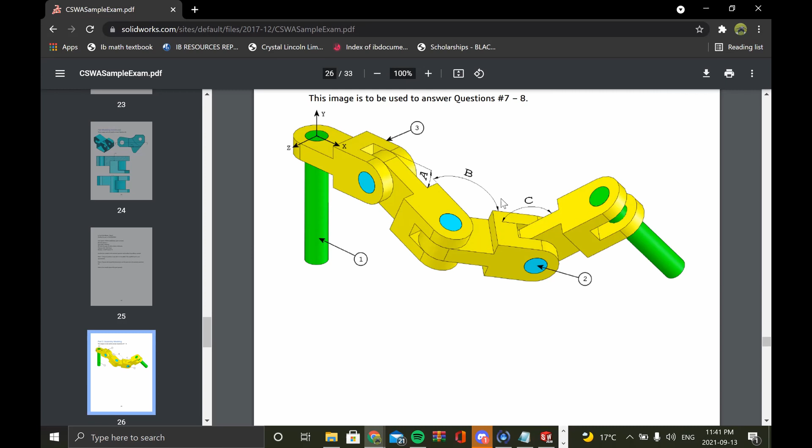Just because you are new doesn't mean you're an expert on it. So I admit that if you were to take this exam now, completely new to SolidWorks, you might still struggle with it. But once you've hopefully worked through the majority of the workshop, you should at least have a good understanding of where to start from. That was kind of my intention.

Most professionally done workshops are like 9 hours long - at least the one I attended had 3 sessions that were 3 hours long each. So I tried to cram most of that into 2 hours by giving you a basic framework rather than working through every single feature. That's why I highly suggest you work and play with SolidWorks on your own, so you get more experience and become more knowledgeable in it. That's basically how I acquired most of my knowledge on it, so I suggest you guys do the same.

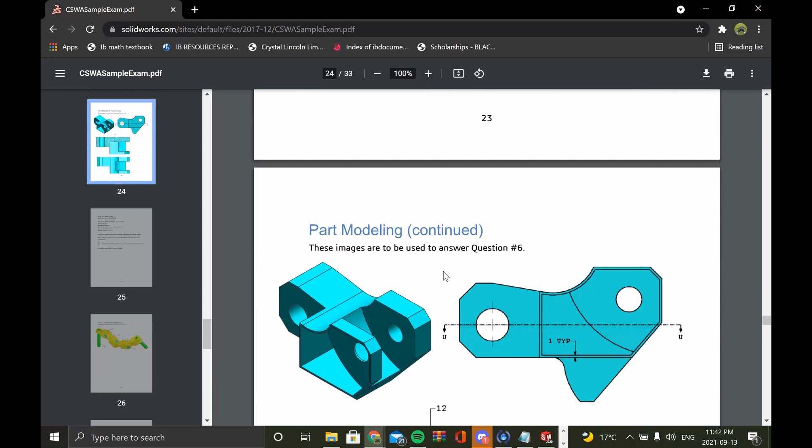So again, most of it is really just modeling using these, and the answers, but yeah, most of it is really just modeling with SolidWorks and giving them the mass value of it. Pretty straightforward exam - straightforward doesn't necessarily mean it's easy, but yes.

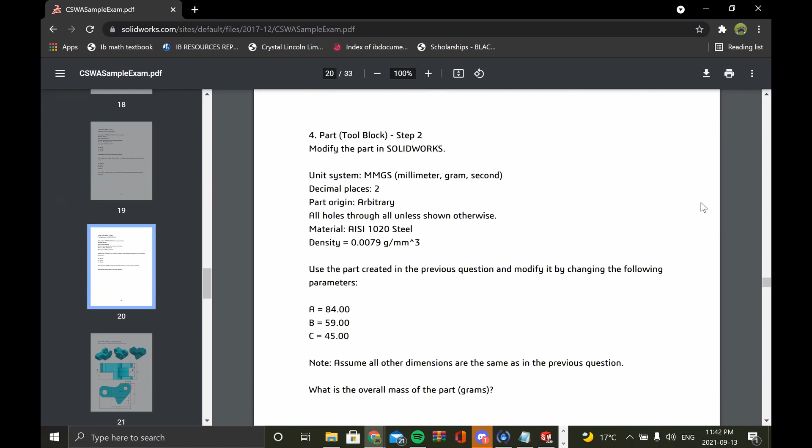In part 2, there's this one part - if you just scroll down, I wanted you to maybe mention that, especially for the video, because I think just a bit up, because I feel like it's one of the tricky points. Come up a little bit more.

So basically that's part of sketch relations. I did go over sketch relations, but I didn't go over that specific one - I just provided the framework of what sketch relations are.

So basically, let's say I want to sketch - I have an arc right here, like that, sure. Then I have a line right here. Wait, no, I have a line here.

As you can see on the bottom right of my cursor, that same icon means the arc is tangent to this vertical line I'm drawing. Just to confirm, if you select this line, then Control-select the arc to go to the sketch relations panel, you should see tangent listed under existing relations. That's what they were talking about - the line should be tangent to each other.

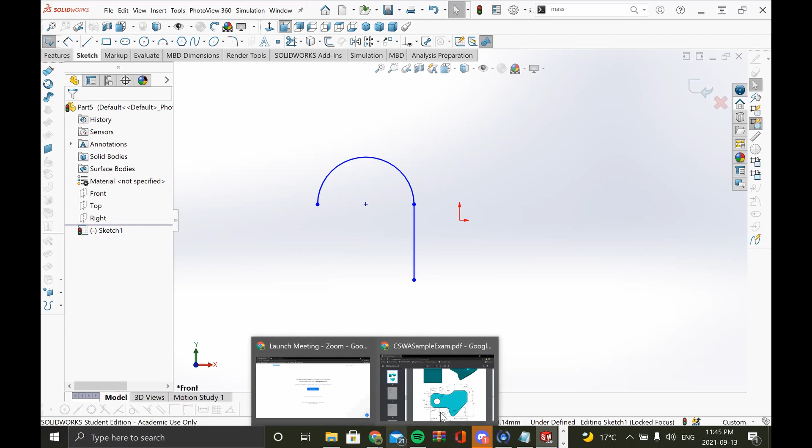So that icon you saw previously was really just saying that this arc right here should be tangent to this straight line, which is what I did here - drawing them, selecting both, then selecting that tangent option. That's what they mean by that.

Mina, is that good? Is that clear? Yeah, that clarifies it. Thank you.